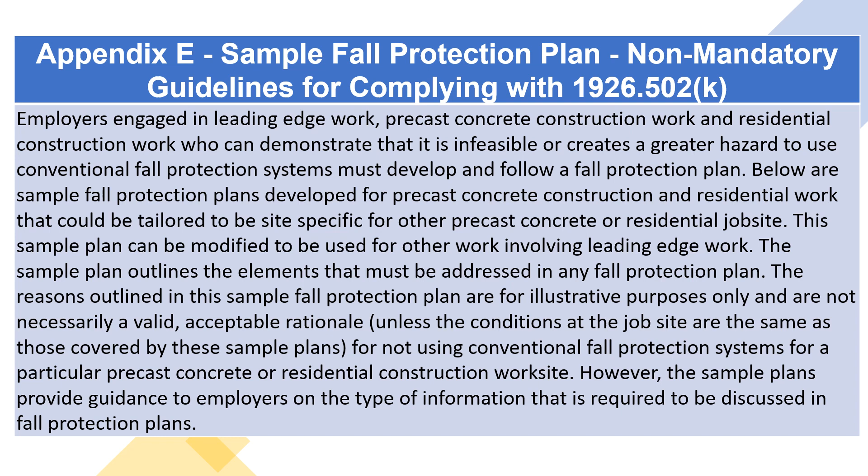The reasons outlined in this sample fall protection plan are for illustrative purposes only and are not necessarily a valid, acceptable rationale, unless the conditions at the job site are the same as those covered by these sample plans, for not using conventional fall protection systems for a particular precast concrete or residential construction worksite. However, the sample plans provide guidance to employers on the type of information that is required to be discussed in fall protection plans. Sample Fall Protection Plans.

Fall Protection Plan for Precast/Pre-Stress Concrete Structures. This fall protection plan is specific for the following project: location of job, erecting company, date plan prepared or modified, plan prepared by, plan approved by, plan supervised by.

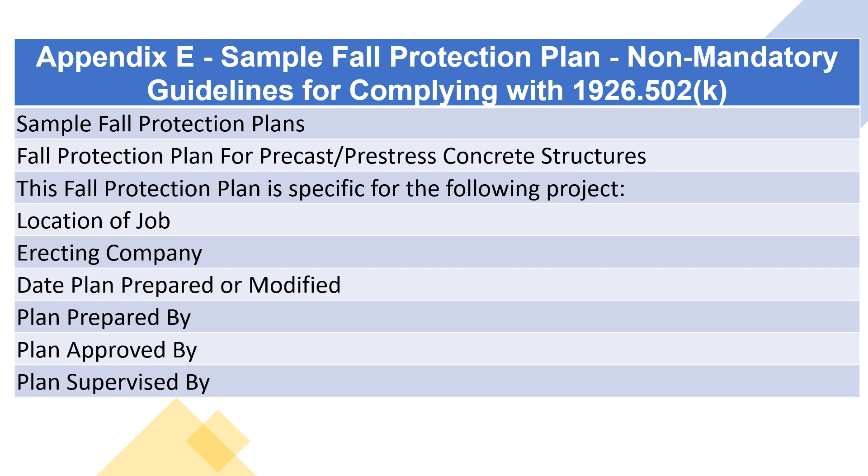The following fall protection plan is a sample program prepared for the prevention of injuries associated with falls. A fall protection plan must be developed and evaluated on a site-by-site basis. It is recommended that erectors discuss the written fall protection plan with their OSHA area office prior to going on a job site. Statement of company policy.

Company name is dedicated to the protection of its employees from on-the-job injuries. All employees of company name have the responsibility to work safely on the job. The purpose of this plan is: A, to supplement our standard safety policy by providing safety standards specifically designed to cover fall protection on this job; and B, to ensure that each employee is trained and made aware of the safety provisions which are to be implemented by this plan prior to the start of erection.

This fall protection plan addresses the use of other than conventional fall protection at a number of areas on the project, as well as identifying specific activities that require non-conventional means of fall protection. These areas include: A, connecting activity, point of erection; B, leading edge work; C, unprotected sides or edges;

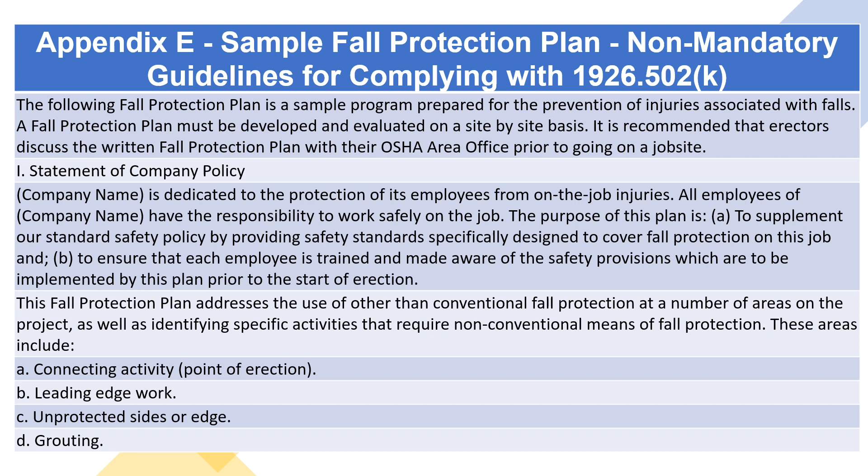D, grouting. This plan is designed to enable employers and employees to recognize the fall hazards on this job and to establish the procedures that are to be followed in order to prevent falls to lower levels or through holes and openings in walking/working surfaces. Each employee will be trained in these procedures and strictly adhere to them except when doing so would expose the employee to a greater hazard.

If, in the employee's opinion, this is the case, the employee is to notify the foreman of the concern, and the concern addressed before proceeding.

Safety policy and procedure on any one project cannot be administered, implemented, monitored, and enforced by any one individual. The total objective of a safe, accident-free work environment can only be accomplished by a dedicated, concerted effort by every individual involved with the project, from management down to the last employee.

Each employee must understand their value to the company, the costs of accidents both monetary, physical, and emotional, the objective of the safety policy and procedures, the safety rules that apply to the safety policy and procedures, and what their individual role is in administering, implementing, monitoring, and compliance of their safety policy and procedures.

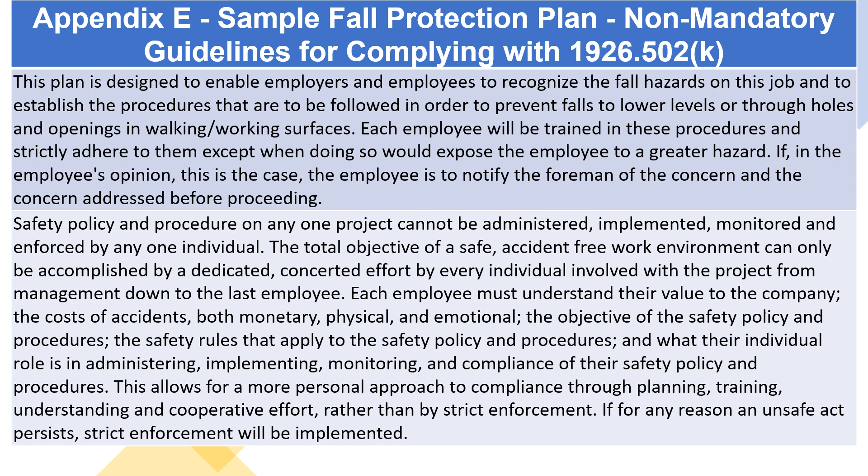This allows for a more personal approach to compliance through planning, training, understanding, and cooperative effort, rather than by strict enforcement. If for any reason an unsafe act persists, strict enforcement will be implemented.

It is the responsibility of the named competent person to implement this fall protection plan. The competent person is responsible for continual observational safety checks of their work operations and to enforce the safety policy and procedures. The foreman also is responsible to correct any unsafe acts or conditions immediately.

It is the responsibility of the employee to understand and adhere to the procedures of this plan and to follow the instructions of the foreman. It is also the responsibility of the employee to bring to management's attention any unsafe or hazardous conditions or acts that may cause injury to either themselves or any other employees.

Any changes to this fall protection plan must be approved by the named qualified person.

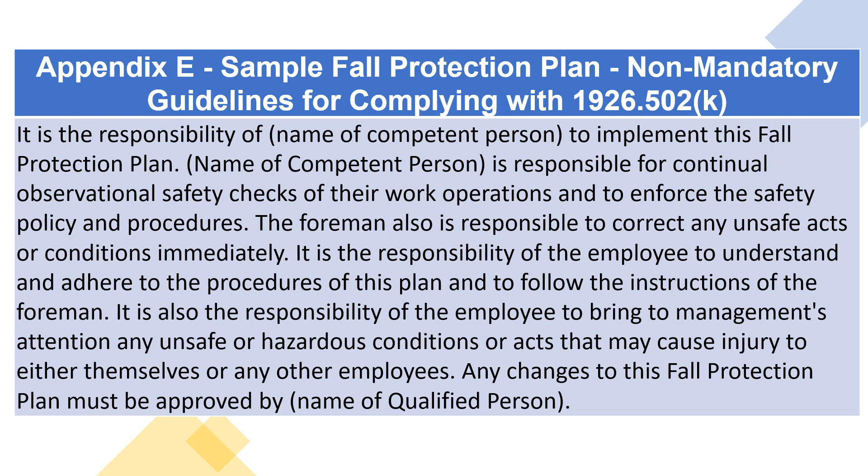Fall protection systems to be used on this project. Where conventional fall protection is infeasible or creates a greater hazard at the leading edge and during initial connecting activity, we plan to do this work using a safety monitoring system and expose only a minimum number of employees for the time necessary to actually accomplish the job.

The maximum number of workers to be monitored by one safety monitor is 6. We are designating the following trained employees as designated erectors, and they are permitted to enter the controlled access zones and work without the use of conventional fall protection.

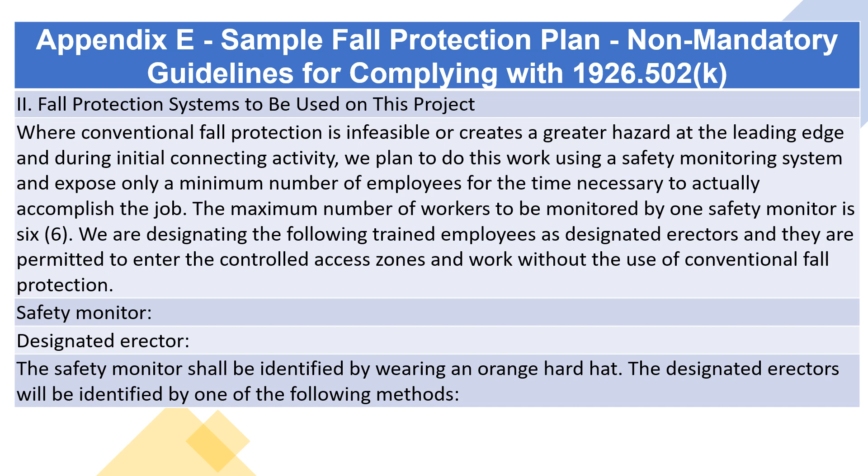Safety monitor, designated erector. The safety monitor shall be identified by wearing an orange hard hat. The designated erectors will be identified by one of the following methods: they will wear a blue-colored armband, or they will wear a blue-colored hard hat, or they will wear a blue-colored vest.

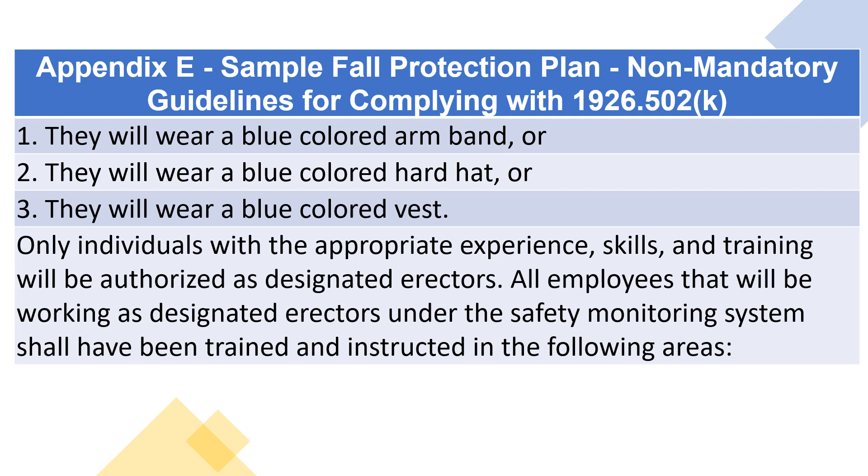Only individuals with the appropriate experience, skills, and training will be authorized as designated erectors. All employees that will be working as designated erectors under the safety monitoring system shall have been trained and instructed in the following areas: 1. Recognition of the fall hazards in the work area, at the leading edge and when making initial connections point of erection.

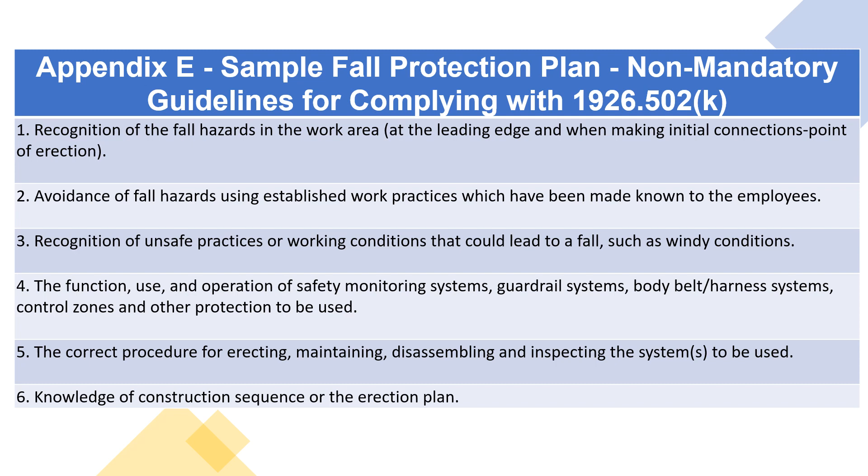2. Avoidance of fall hazards using established work practices which have been made known to the employees. 3. Recognition of unsafe practices or working conditions that could lead to a fall, such as windy conditions. 4. The function, use, and operation of safety monitoring systems, guardrail systems, body belt/harness systems, control zones, and other protection to be used. 5. The correct procedure for erecting, maintaining, disassembling, and inspecting the systems to be used. 6. Knowledge of construction sequence or the erection plan.

A conference will take place prior to starting work involving all members of the erection crew, crane crew, and supervisors of any other concerned contractors. This conference will be conducted by the precast concrete erection supervisor in charge of the project. During the pre-work conference, erection procedures and sequences pertinent to this job will be thoroughly discussed and safety practices to be used throughout the project will be specified.

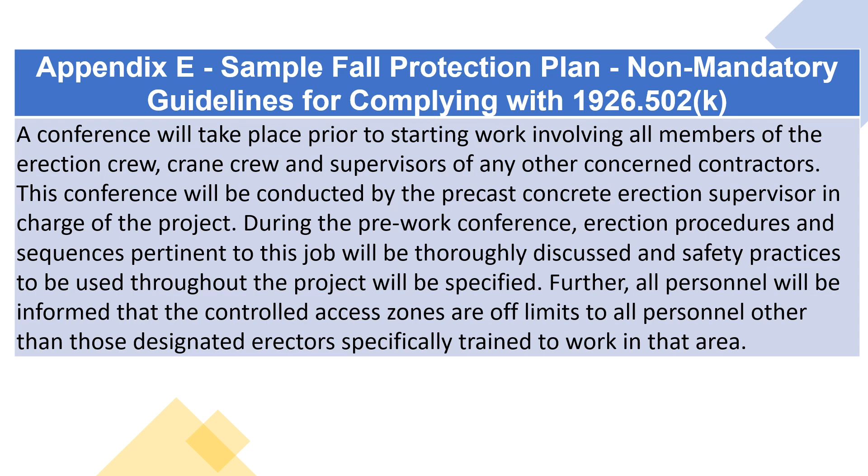Further, all personnel will be informed that the controlled access zones are off limits to all personnel other than those designated erectors specifically trained to work in that area.

Safety monitoring system: a fall protection system in which a competent person is responsible for recognizing and warning employees of fall hazards. The duties of the safety monitor are: 1. Warn by voice when approaching the open edge in an unsafe manner. 2. Warn by voice if there is a dangerous situation developing which cannot be seen by another person involved with product placement, such as a member getting out of control.

3. Make the designated erectors aware they are in a dangerous area. 4. Be competent in recognizing fall hazards. 5. Warn employees when they appear to be unaware of a fall hazard or are acting in an unsafe manner. 6. Be on the same walking/working surface as the monitored employees and within visual sighting distance of the monitored employees. 7. Be close enough to communicate orally with the employees. 8. Not allow other responsibilities to encumber monitoring.

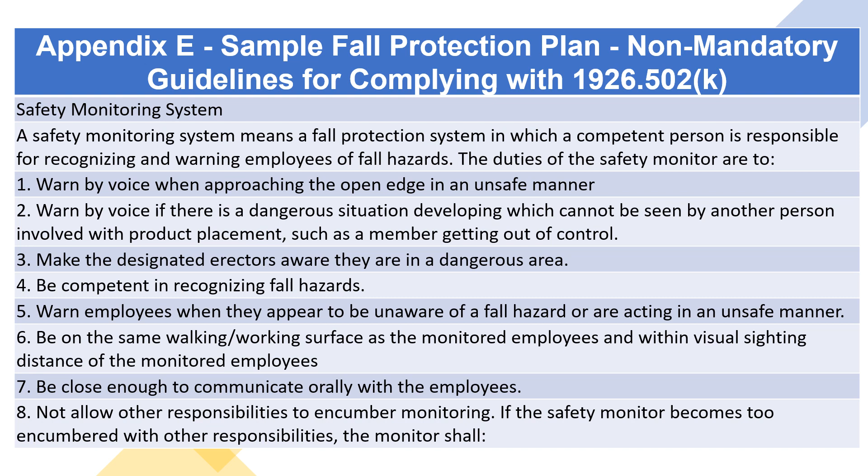If the safety monitor becomes too encumbered with other responsibilities, the monitor shall: 1. Stop the erection process, and 2. Turn over other responsibilities to a designated erector, or 3. Turn over the safety monitoring function to another designated, competent person.

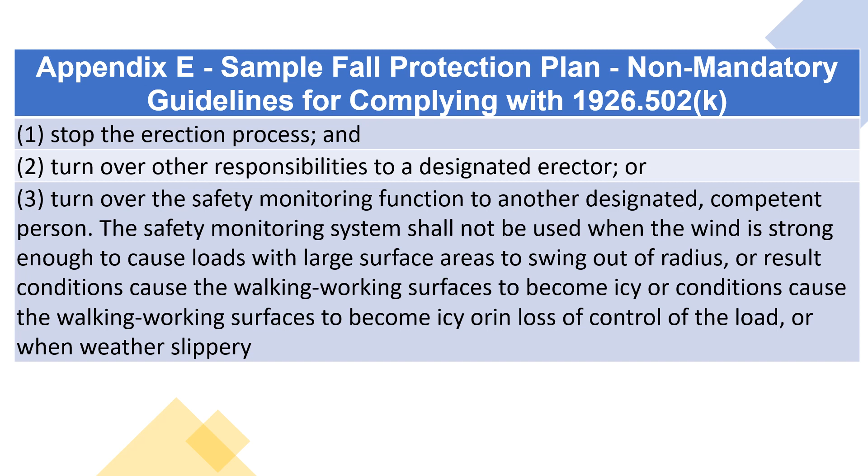The safety monitoring system shall not be used when the wind is strong enough to cause loads with large surface areas to swing out of radius, or conditions cause the walking working surfaces to become icy, or there is loss of control of the load, or when weather is slippery.

Control zone system. A controlled access zone means an area designated and clearly marked, in which leading edge work may take place without the use of guardrail, safety net, or personal fall arrest systems to protect the employees in the area. Control zone systems shall comply with the following provisions.

1. When used to control access to areas where leading edge and other operations are taking place, the controlled access zone shall be defined by a control line or by any other means that restricts access. When control lines are used, they shall be erected not less than 6 feet (1.8 m), nor more than 60 feet (18 meters), or half the length of the member being erected, whichever is less, from the leading edge.

2. The control line shall extend along the entire length of the unprotected or leading edge and shall be approximately parallel to the unprotected or leading edge.

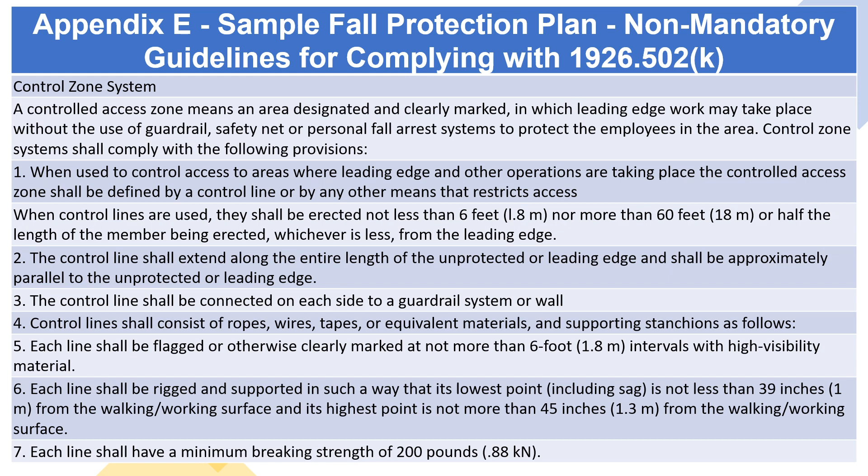The control line shall be connected on each side to a guardrail system or wall. Control lines shall consist of ropes, wires, tapes, or equivalent materials, and supporting stanchions. Each line shall be flagged or otherwise clearly marked at intervals of not more than 6 feet (1.8 m) with high visibility material. Each line shall be rigged and supported so that its lowest point, including sag, is not less than 39 inches (1 meter) from the walking/working surface, and its highest point is not more than 45 inches (1.3 meters) from the walking/working surface. Each line shall have a minimum breaking strength of 200 pounds (0.88 kN).

Holes: all openings greater than 12 inches by 12 inches will have perimeter guarding or covering. All predetermined holes will have plywood covers made in the precaster's yard and shipped with the member to the job site. Prior to cutting holes on the job, proper protection for the hole must be provided to protect the workers. Perimeter guarding or covers will not be removed without the approval of the erection foreman.

Precast concrete column erection through the existing deck requires that many holes be provided through this deck. These are to be covered and protected. Except for the opening currently being used to erect a column, all opening protection is to be left undisturbed. The opening being uncovered to erect a column will become part of the point of erection and will be addressed as part of this fall protection plan. This uncovering is to be done at the erection foreman's direction and will only occur immediately prior to feeding the column through the opening. Once the end of the column is through the slab opening, there will no longer exist a fall hazard at this location.

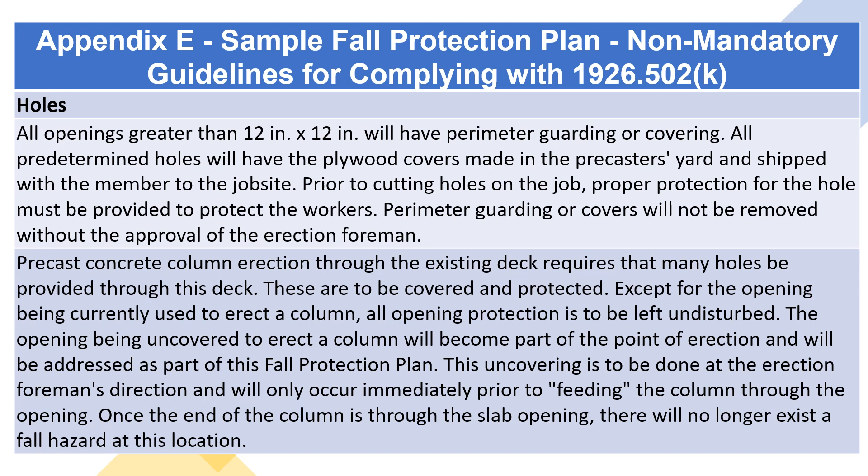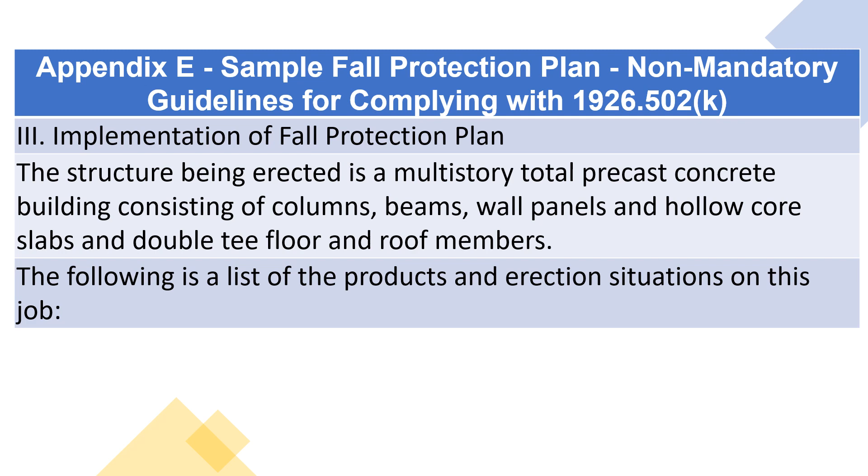Implementation of the fall protection plan. The structure being erected is a multi-story total precast concrete building consisting of columns, beams, wall panels, hollow core slabs, and double tee floor and roof members. The following is a list of the products and erection situations on this job.

Columns: for columns 10 feet to 36 feet long, employees disconnecting crane hooks from columns will work from a ladder and wear a body belt/harness with lanyard, tying off when both hands are needed to disconnect. For tying off, a vertical lifeline will be connected to the lifting eye at the top of the column, prior to lifting, to be used with a manually operated or mobile rope grab. For columns too high for the use of a ladder, 36 feet and higher, an added cable will be used to reduce the height of the disconnecting point so that a ladder can be used.

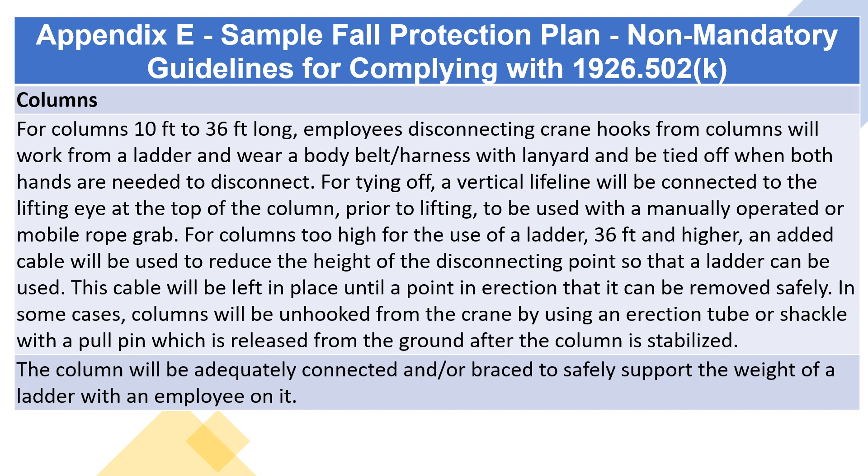This cable will be left in place until a point in erection when it can be removed safely. In some cases, columns will be unhooked from the crane using an erection tube or shackle with a pull pin, which is released from the ground after the column is stabilized. The column will be adequately connected and/or braced to safely support the weight of a ladder with an employee on it.

Inverted T-beams: employees erecting inverted T-beams at a height of 6 to 40 feet will erect the beam, make initial connections, and final alignment from a ladder. If the employee needs to reach over the side of the beam to bar or adjust the alignment of the beam, they will mount the beam and tie off to the lifting device in the beam after ensuring the load has been stabilized on its bearing. To disconnect the crane from the beam, an employee will stand a ladder against the beam.

Because the use of ladders is not practical at heights above 40 feet, beams will be initially placed using taglines, with their final alignment made by a person on a man lift or similar employee positioning system.

Spandrel beams at the exterior of the building will be aligned as closely as possible using taglines, with the final placement of the spandrel beam made from a ladder at the open end of the structure. A ladder will be used to make the initial connections and a ladder will be used to disconnect the crane. The other end of the beam will be placed by the designated erector from the double T deck under the observation of the safety monitor.

The beams will be adequately connected and/or braced to safely support the weight of a ladder with an employee on it, for floor and roof members.

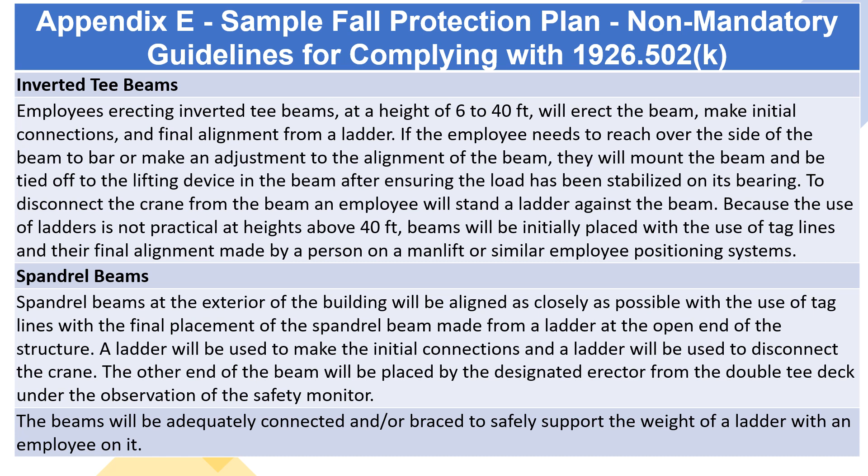During installation of the precast concrete floor and/or roof members, the work deck continuously increases in area as more and more units are being erected and positioned.

Thus, the unprotected floor/roof perimeter is constantly modified with the leading edge changing location as each member is installed. Fall protection for workers at the leading edge shall be assured by properly constructed and maintained control zone lines not more than 60 feet away from the leading edge, supplemented by a safety monitoring system to ensure the safety of all designated erectors working within the area defined by the control zone lines.

The hollow core slabs erected on the masonry portion of the building will be erected and grouted using the safety monitoring system. Grout will be placed in the space between the end of the slab and face shell of the concrete masonry by dumping from a wheelbarrow.

The grout in the keyways between the slabs will be dumped from a wheelbarrow and then spread with long-handled tools, allowing the worker to stand erect facing toward the unprotected edge and back from any workdeck edge.

Whenever possible, the designated erectors will approach the incoming member at the leading edge only after it is below waist height so that the member itself provides protection against falls.

Except for the situations described below, when the arriving floor or roof member is within 2 to 3 inches of its final position, the designated erectors can then proceed to their position of erection at each end of the member under the control of the safety monitor.

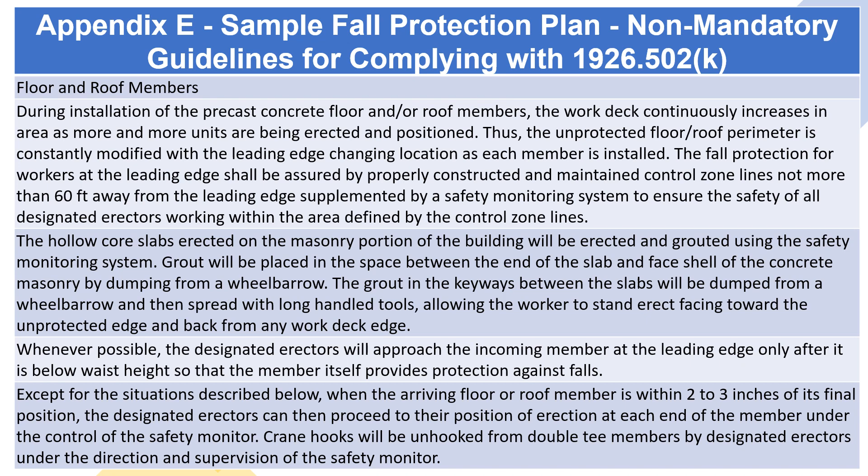Crane hooks will be unhooked from double T members by designated erectors under the direction and supervision of the safety monitor. Designated erectors, while waiting for the next floor or roof member, will be constantly under the control of the safety monitor for fall protection and are directed to stay a minimum of 6 feet from the edge.

In the event a designated erector must move from one end of a member which has just been placed at the leading edge, they must first move away from the leading edge a minimum of 6 feet and then progress to the other end while maintaining the minimum distance of 6 feet at all times.

Erection of double Ts, where conditions require bearing of one end into a closed pocket and the other end on a beam ledge, restricting the T-legs from going directly into the pockets, requires special considerations. The T-legs that are to bear in the closed pocket must hang lower than those at the beam bearing.

The double T will be two-lined in order to elevate one end higher than the other to allow for the low end to be ducked into the closed pocket, using the following procedure.

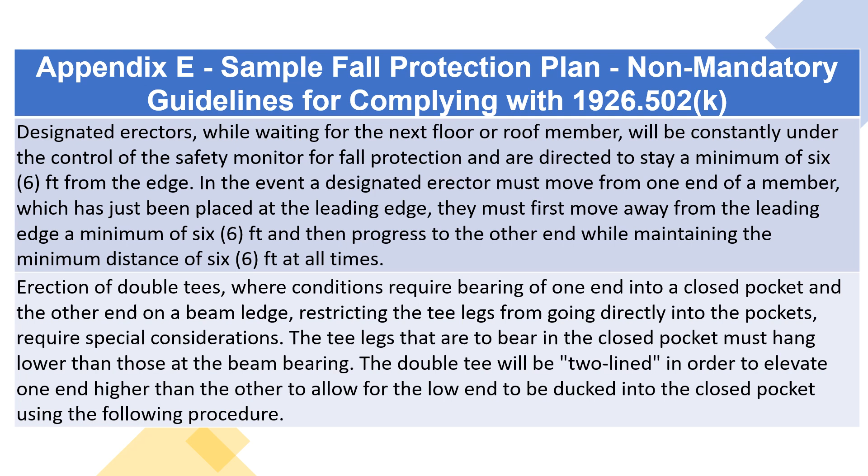The double T will be rigged with a standard 4-way spreader off of the main load line. An additional choker will be attached to the married point of the two-legged spreader at the end of the T that is to be elevated.

The double T will be hoisted with the main load line and swung into a position as close as possible to the T's final bearing elevation. When the T is in this position and stabilized, the whip line load block will be lowered to just above the T deck.

At this time, two erectors will walk out on the suspended T deck at mid-span of the T member and pull the load block to the end of the T to be elevated and attach the additional choker to the load block.

The possibility of entanglement with the crane lines and other obstacles during this two-lining process, while raising and lowering the crane block on that second line, could be hazardous to an encumbered employee. Therefore, the designated erectors will not tie off during any part of this process. While the designated erectors are on the double T, the safety monitoring system will be used.

After attaching the choker, the two erectors then step back on the previously erected T deck and signal the crane operator to hoist the load with the whip line to the elevation that will allow for enough clearance to let the low-end T-legs slide into the pockets when the main load line is lowered.

The erector who is handling the lowered end of the T at the closed pocket bearing will step out on the suspended T.

An erection bar will be placed between the end of the T-leg and the inside face of the pocketed spandrel member. The T is barred away from the pocketed member to reduce the friction and lateral force against it. As the T is being lowered, the other erector remains on the previously erected T to handle the other end. The T is then slowly lowered by the crane to a point where the T-legs can freely slide into the pockets.

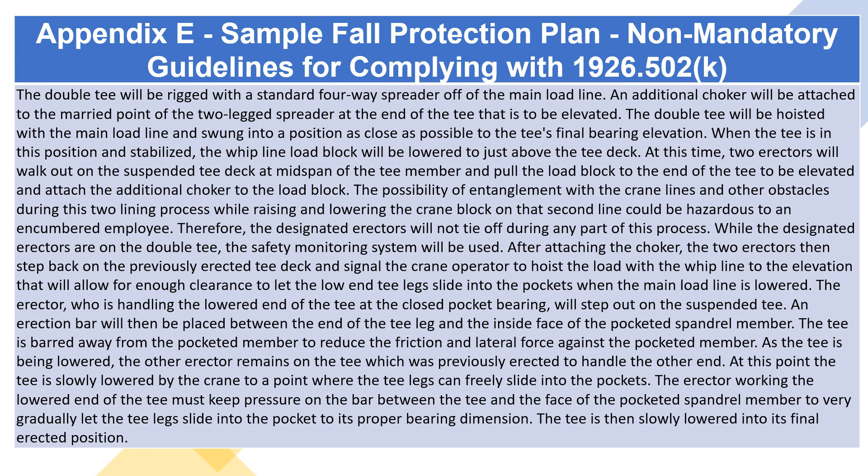The erector working the lowered end of the T must keep pressure on the bar between the T and the face of the pocketed spandrel member, gradually letting the T-leg slide into the pocket to its proper bearing dimension. The T is then slowly lowered into its final erected position.

The designated erector should be allowed onto the suspended double T, otherwise there is no control over its horizontal movement, which could knock the spandrel off its bearing or the column out of plumb. The control necessary to prevent hitting the spandrel can only be done safely from the top of the double T being erected.

Load-bearing wall panels: the erection of load-bearing wall panels on elevated decks requires the use of a safety monitor and a controlled access zone, a minimum of 25 feet and a maximum of half the length of the wall panels away from the unprotected edge, so that designated erectors can move freely and unencumbered when receiving the panels.

Bracing, if required for stability, will be installed by ladder. After the braces are secured, the crane will be disconnected from the wall using a ladder. The wall-to-wall connections will also be performed from a ladder.

Non-load-bearing panels, cladding: the locating of survey lines, panel layout, and other installation prerequisites, pre-welding, etc., for non-load-bearing panels and cladding will not commence until the floor perimeter and floor openings have been protected.

In some areas, panel configuration requires removing the perimeter protection as the cladding is being installed. This removal will be performed on a bay-to-bay basis, just ahead of cladding erection, to minimize temporarily unprotected floor edges. Workers within 6 feet of the edge, receiving and positioning the cladding when the perimeter protection is removed, shall be tied off.

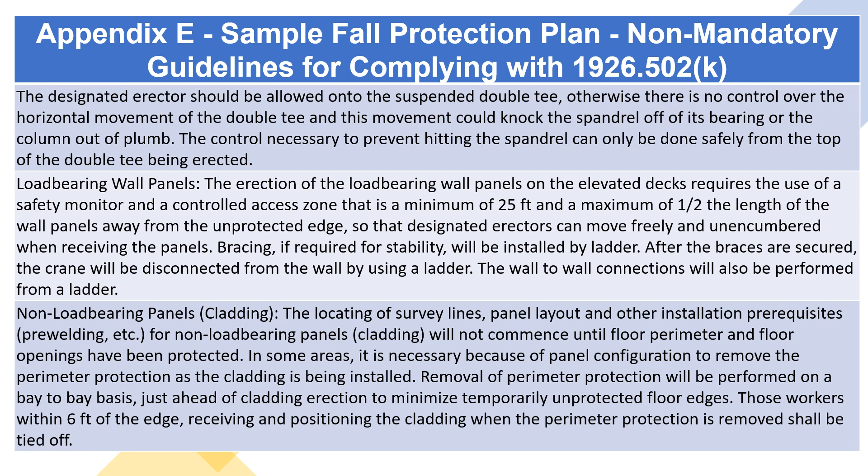Detailing: employees exposed to falls of 6 feet or more to lower levels, who are not actively engaged in leading edge work or connecting activity such as welding, bolting, cutting, bracing, guying, patching, or painting, and who are working less than 6 feet from an unprotected edge, will be tied off at all times or guardrails will be installed.

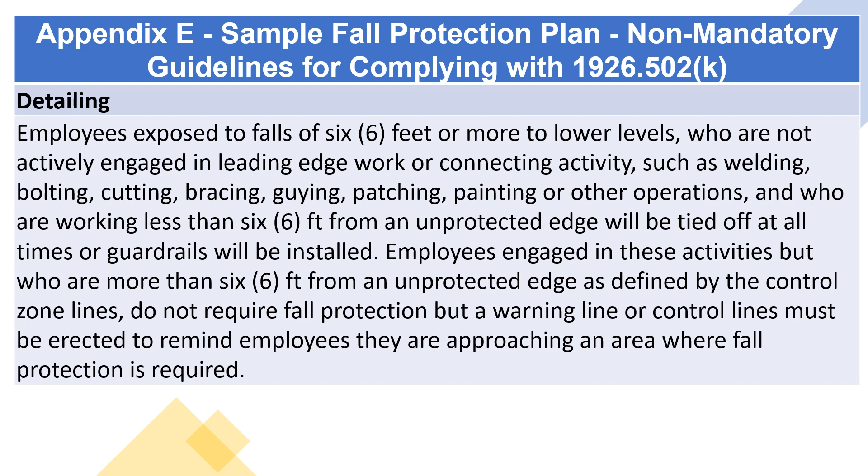Employees engaged in these activities but who are more than 6 feet from an unprotected edge, as defined by the control zone lines, do not require fall protection, but a warning line or control line must be erected to remind employees they are approaching an area where fall protection is required. Conventional fall protection is considered for the point of erection or leading edge erection operations.

Personal fall arrest systems: in this particular erection sequence and procedure, personal fall arrest systems requiring body belt or harness systems, lifelines, and lanyards will not reduce possible hazards to workers, and will create offsetting hazards during their usage at the leading edge of precast/pre-stressed concrete construction.

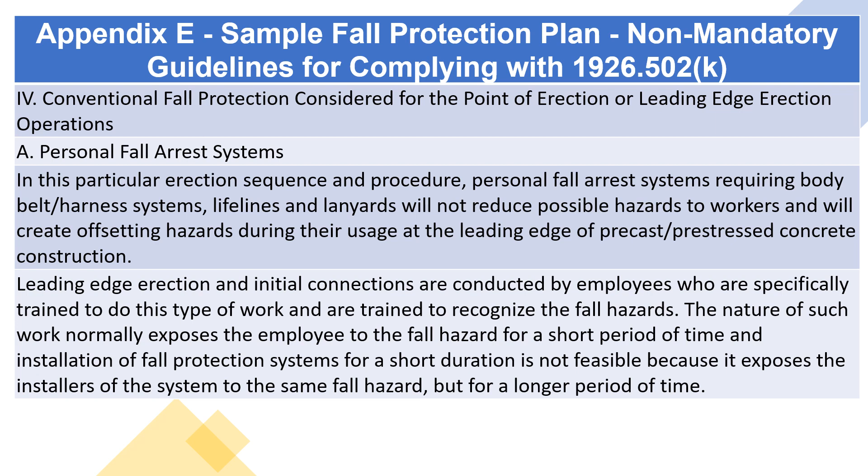Leading edge erection and initial connections are conducted by employees specifically trained to do this type of work and trained to recognize the fall hazards. The nature of such work normally exposes the employee to the fall hazard for only a short period of time, and installation of fall protection systems for such a short duration is not feasible, because it exposes the installers of the system to the same fall hazard, but for a longer period of time.

First, it is necessary that the employee be able to move freely without encumbrance in order to guide sections of precast concrete into their final position, without having lifelines attached which would restrict the employee's ability to move about at the point of erection.

Second, a typical procedure requires two or more workers to maneuver around each other as a concrete member is positioned to fit into the structure. If each is attached to a lifeline, part of their attention must be diverted from positioning a member weighing several tons to avoiding entanglement of their lifelines or tripping over lanyards. Therefore, if these workers are attached to lanyards, more fall potential would result than from not using such a device.

In this specific erection sequence and procedure, retractable lifelines do not solve the problem of 2 workers becoming tangled. In fact, such a tangle could prevent the lifeline from retracting as the worker moved, thus potentially exposing the worker to a fall greater than 6 feet. Also, a worker crossing over the lifeline of another worker can create a hazard because the movement of one person can unbalance the other. In the event of a fall by one person, there is a likelihood that the other person will be caused to fall as well.

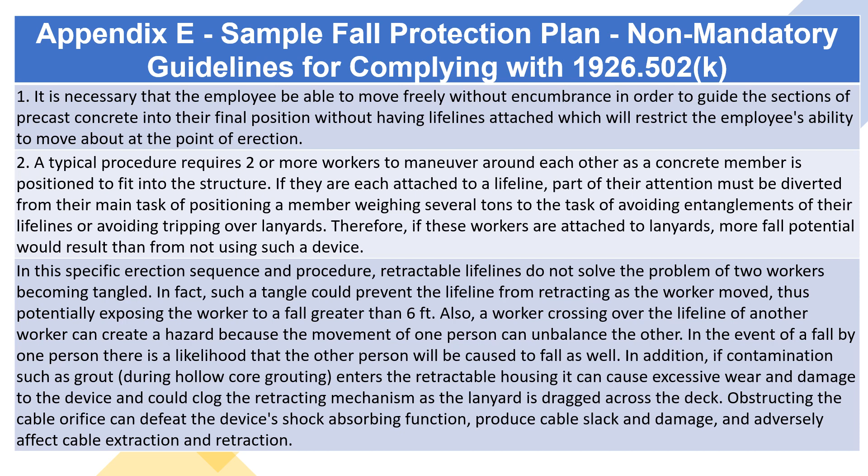In addition, if contamination such as grout, during hollow core grouting, enters the retractable housing, it can cause excessive wear and damage to the device and could clog the retracting mechanism as the lanyard is dragged across the deck. Obstructing the cable orifice can defeat the device's shock-absorbing function, produce cable slack and damage, and adversely affect cable extraction and retraction.

3. Employees tied to a lifeline can be trapped and crushed by moving structural members if the employee becomes restrained by the lanyard or retractable lifeline and cannot get out of the path of the moving load. The sudden movement of a precast concrete member being raised by a crane can be caused by a number of factors. When this happens, a connector may immediately have to move a considerable distance to avoid injury. If a tied-off body belt/harness is being used, the connector could be trapped. Therefore, there is a greater risk of injury if the connector is tied to the structure for this specific erection sequence and procedure.

When necessary to move away from a retractable device, the worker cannot move at a rate greater than the device locking speed, typically 3.5 to 4.5 feet per second. When moving toward the device, it is necessary to move at a rate which does not permit cable slack to build up. This slack may cause cable retraction acceleration and cause a worker to lose their balance by applying a higher than normal jerking force on the body when the cable suddenly becomes taut after building up momentum. This slack can also cause damage to the internal spring-loaded drum, uneven coiling of cable on the drum, and possible cable damage.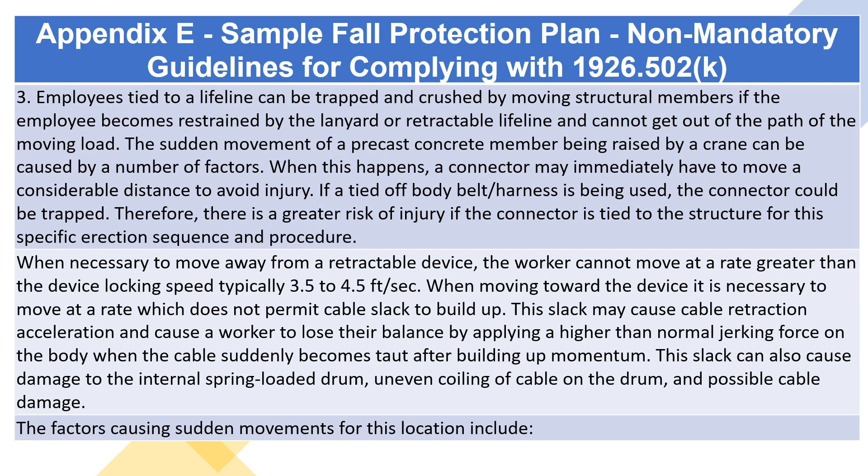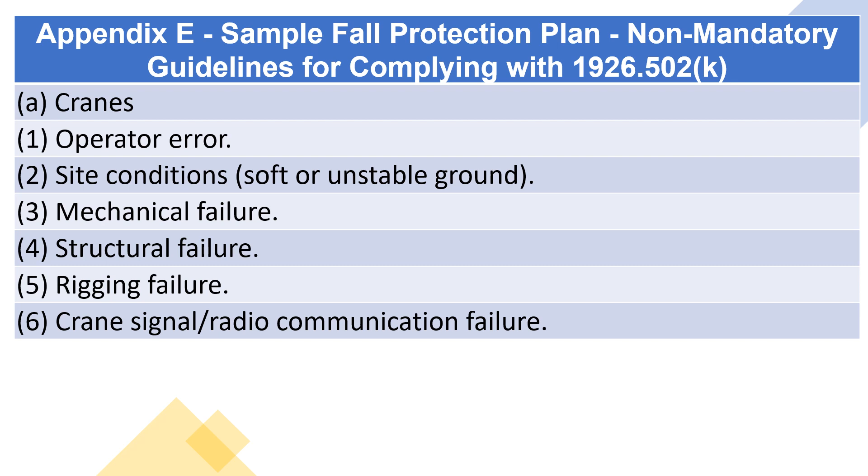The factors causing sudden movements for this location include: A. Cranes. 1. Operator error. 2. Site conditions, soft or unstable ground. 3. Mechanical failure. 4. Structural failure. 5. Rigging failure. 6. Crane signal/radio communication failure. B. Weather conditions. 1. Wind, strong wind/sudden gusting, particularly a problem with the large surface areas of precast concrete members. 2. Snow/rain, visibility. 3. Fog, visibility. 4. Cold, causing slowed reactions or mechanical problems.

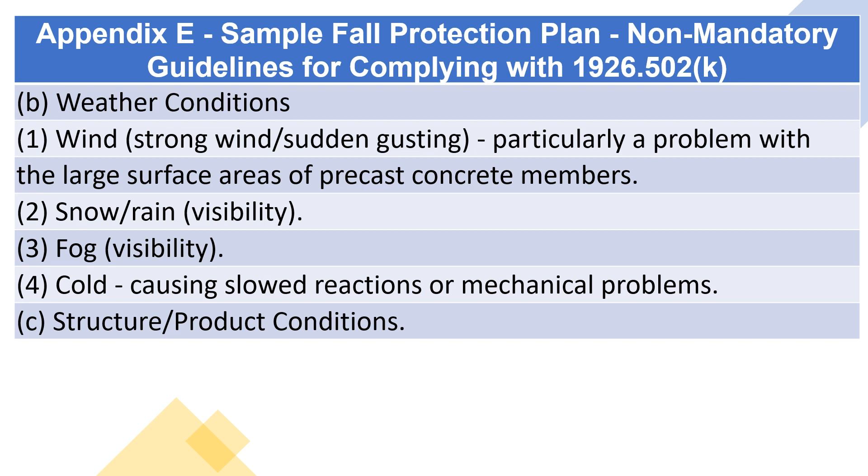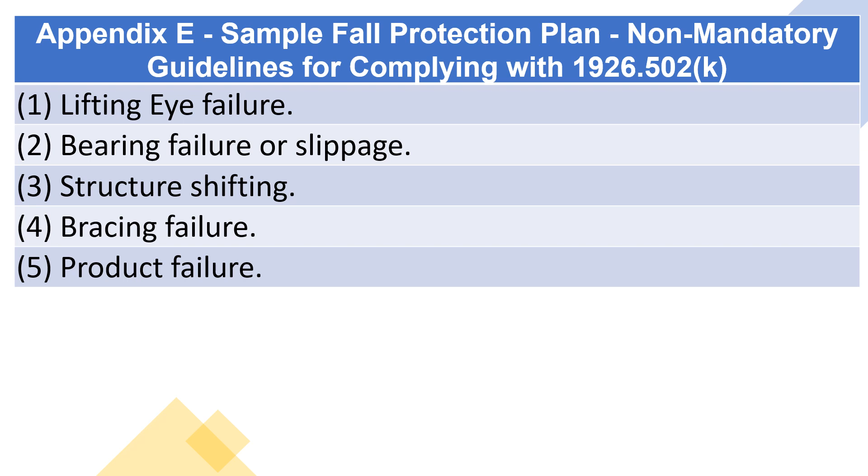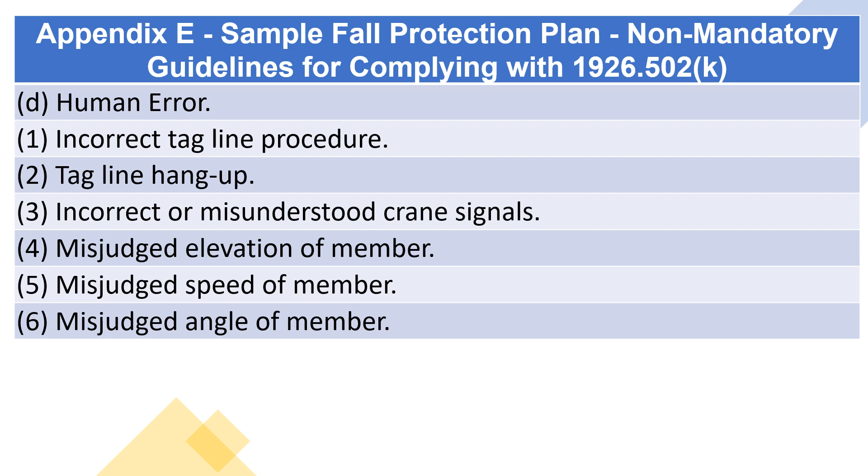C. Structure/product conditions. 1. Lifting eye failure. 2. Bearing failure or slippage. 3. Structure shifting. 4. Bracing failure. 5. Product failure. D. Human error. 1. Incorrect tagline procedure. 2. Tagline hang-up. 3. Incorrect or misunderstood crane signals. 4. Misjudged elevation of member. 5. Misjudged speed of member. 6. Misjudged angle of member.

4. Anchorages or special attachment points could be cast into the precast concrete members if sufficient pre-planning and consideration of erector's position is done before the members are cast. Any hole or other attachment must be approved by the engineer who designed the member. It is possible that some design restrictions will not allow a member to be weakened by an additional hole. However, it is anticipated that such situations would be the exception, not the rule.

Attachment points, other than on the deck surface, will require removal and/or patching. Removing and/or patching these points requires the employee to be exposed to an additional fall hazard at an unprotected perimeter. The fact that attachment points could be available anywhere on the structure does not eliminate the hazards of using these points for tying off as discussed above. A logical point for tying off on double T's would be using the lifting loops, except that they must be cut off to eliminate a tripping hazard at an appropriate time.

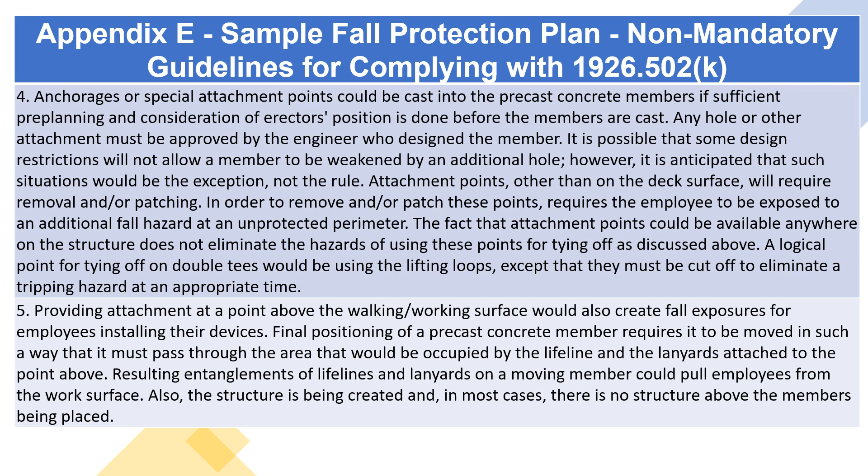5. Providing attachment at a point above the walking/working surface would also create fall exposures for employees installing their devices. Final positioning of a precast concrete member requires it to be moved in such a way that it must pass through the area that would be occupied by the lifeline and the lanyards attached to the point above. Resulting entanglements of lifelines and lanyards on a moving member could pull employees from the work surface. Also, the structure is being created and, in most cases, there is no structure above the members being placed. A. Temporary structural supports, installed to provide attaching points for lifelines, limit the space which is essential for orderly positioning, alignment and placement of the precast concrete members.

To keep the lanyards a reasonable and manageable length, lifeline supports would necessarily need to be in proximity to the positioning process. A sudden shift of the precast concrete member being positioned because of wind pressure or crane movement could make it strike the temporary supporting structure, moving it suddenly and causing tied-off employees to fall.

B. The time in man-hours which would be expended in placing and maintaining temporary structural supports for lifeline attaching points could exceed the expended man-hours involved in placing the precast concrete members. No protection could be provided for the employees erecting the temporary structural supports, and these supports would have to be moved for each successive step in the construction process, thus greatly increasing the employee's exposure to the fall hazard.

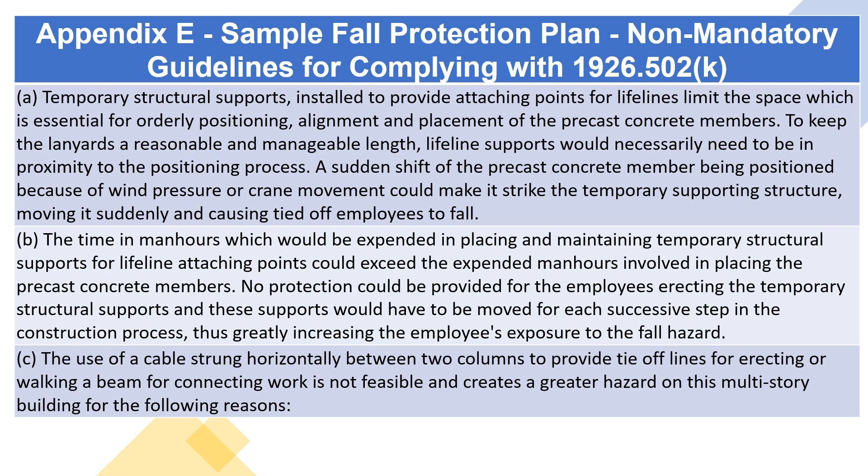C. The use of a cable strung horizontally between two columns to provide tie-off lines for erecting or walking a beam for connecting work is not feasible and creates a greater hazard on this multi-story building for the following reasons. 1. If a connector is to use such a line, it must be installed between the two columns. To perform this installation requires an erector to have more fall exposure time attaching the cable to the columns than would be spent to make the beam-to-column connection itself.

2. If such a line is to be installed so that an erector can walk along a beam, it must be overhead or below him. For example, if a connector must walk along a 24 inches wide beam, the presence of a line next to the connector at waist level, attached directly to the columns, would prevent the connector from centering their weight over the beam and balancing themselves.

Installing the line above the connector might be possible on the first level of a two-story column. However, the column may extend only a few feet above the floor level at the second level or be flush with the floor level. Attaching the line to the side of the beam could be a solution, however, it would require the connector to attach the lanyard below foot level, which would most likely extend a fall farther than 6 feet.

3. When lines are strung over every beam, it becomes more and more difficult for the crane operator to lower a precast concrete member into position without the member becoming fouled. Should the member become entangled, it could easily dislodge the line from a column. If a worker is tied to it at the time, a fall could be caused.

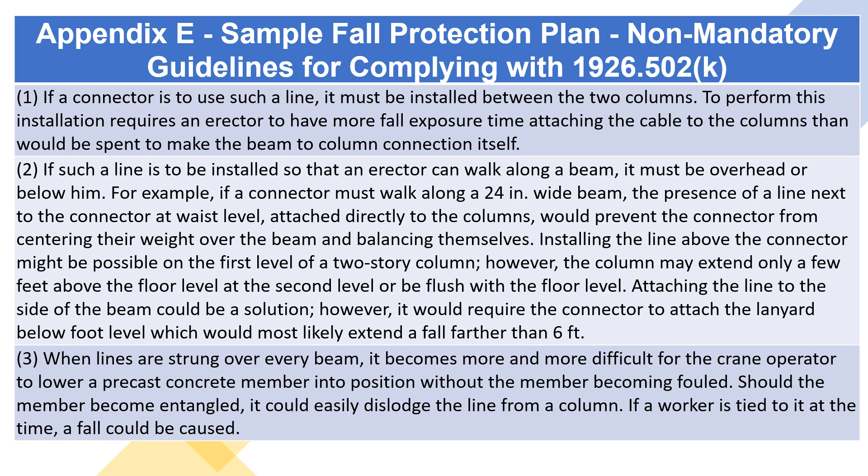6. The ANSI A10.14-1991 American National Standard for Construction and Demolition Operations requirements for safety belts, harnesses, lanyards and lifelines for construction and demolition use states that the anchor point of a lanyard or deceleration device should, if possible, be located above the wearer's belt or harness attachment. ANSI A10.14 also states that a suitable anchorage point is one which is located as high as possible to prevent contact with an obstruction below should the worker fall.

Most manufacturers also warn in the user's handbook that the safety block/retractable lifeline must be positioned above the D-ring, above the workspace of the intended user, and OSHA recommends that fall arrest and restraint equipment be used in accordance with the manufacturer's instructions. Attachment of a retractable device to a horizontal cable near floor level or using the inserts in the floor or roof members may result in increased free fall due to the dorsal D-ring of the full-body harness riding higher than the attachment point of the snap hook to the cable or insert, e.g., 6-foot-tall worker with a dorsal D-ring at 5 feet above the floor or surface, reduces the working length to only 1 foot by placing the anchorage 5 feet away from the fall hazard.

In addition, impact loads may exceed maximum fall arrest forces, MAF, because the fall arrest D-ring would be 4 to 5 feet higher than the safety block/retractable lifeline anchored to the walking working surface, and the potential for swing hazards is increased. Manufacturers also require that workers not work at a level where the point of snap hook attachment to the body harness is above the device because this will increase the free fall distance and the deceleration distance and will cause higher forces on the body in the event of an accidental fall.

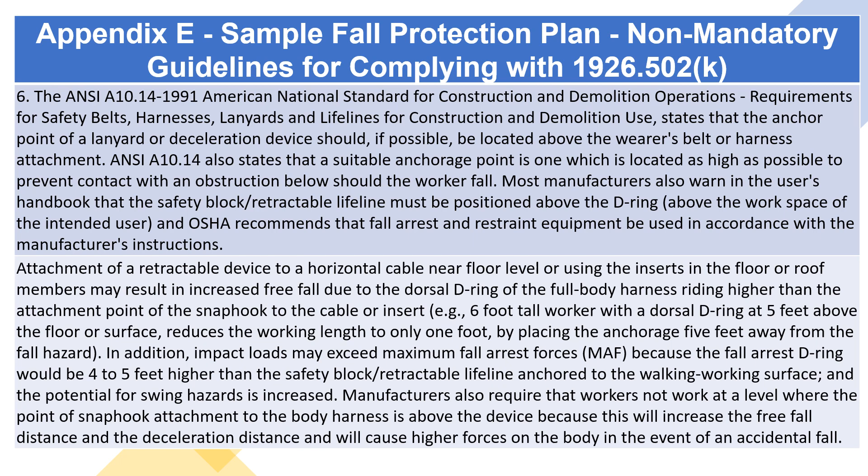Manufacturers recommend an anchorage for the retractable lifeline which is immovably fixed in space and is independent of the user's support systems. A movable anchorage is one which can be moved around, such as equipment or wheeled vehicles, or which can deflect substantially under shock loading, such as a horizontal cable or very flexible beam.

In the case of a very flexible anchorage, a shock load applied to the anchorage during fall arrest can cause oscillation of the flexible anchorage such that the retractable brake mechanism may undergo one or more cycles of locking/unlocking/locking, ratchet effect, until the anchorage deflection is dampened. Therefore, use of a movable anchorage involves critical engineering and safety factors and should only be considered after fixed anchorage has been determined to be not feasible.

Horizontal cables used as an anchorage present an additional hazard due to amplification of the horizontal component of maximum arrest force of a fall, transmitted to the points where the horizontal cable is attached to the structure. This amplification is due to the angle of sag of a horizontal cable and is most severe for small angles of sag. For a cable sag angle of 2 degrees, the horizontal force on the points of cable attachment can be amplified by a factor of 15.

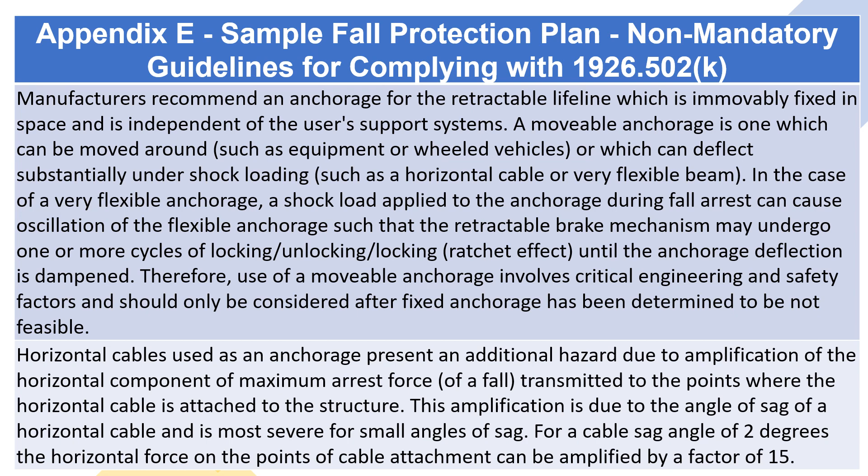It is also necessary to install the retractable device vertically overhead to minimize swing falls. If an object is in the worker's swing path, or that of the cable, hazardous situations exist. 1. Due to the swing, horizontal speed of the user may be high enough to cause injury when an obstacle in the swing fall path is struck by either the user or the cable. 2. The total vertical fall distance of the user may be much greater than if the user had fallen only vertically without a swing fall path.

With retractable lines, overconfidence may cause the worker to engage in inappropriate behavior, such as approaching the perimeter of a floor or roof at a distance appreciably greater than the shortest distance between the anchorage point and the leading edge. Though the retractable lifeline may arrest a worker's fall before he or she has fallen a few feet, the lifeline may drag along the edge of the floor or beam and swing the worker like a pendulum until the line has moved to a position where the distance between the anchorage point and floor edge is the shortest distance between those 2 points. Accompanying this pendulum swing is a lowering of the worker, with the attendant danger that he or she may violently impact the floor or some obstruction below.

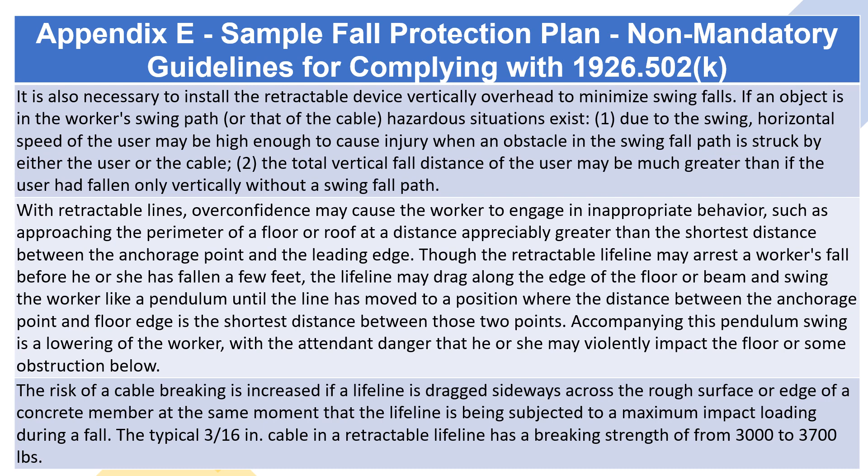The risk of a cable breaking is increased if a lifeline is dragged sideways across the rough surface or edge of a concrete member at the same moment that the lifeline is being subjected to a maximum impact loading during a fall. The typical 3/16 inch cable in a retractable lifeline has a breaking strength of from 3,000 to 3,700 pounds. 7. The competent person, who can take into account the specialized operations being performed on this project, should determine when and where a designated erector cannot use a personal fall arrest system.

B. Safety net systems. The nature of this particular precast concrete erection worksite precludes the safe use of safety nets where point of erection or leading edge work must take place. To install safety nets in the interior high bay of the single-story portion of the building poses rigging attachment problems. Structural members do not exist to which supporting devices for nets can be attached in the area where protection is required. As the erection operation advances, the location of point of erection or leading edge work changes constantly as each member is attached to the structure. Due to this constant change, it is not feasible to set net sections and build separate structures to support the nets.

2. The nature of the erection process for the precast concrete members is such that an installed net would protect workers as they position and secure only one structural member. After each member is stabilized, the net would have to be moved to a new location. This could mean a move of 8 to 10 feet or the possibility of a move to a different level or area of the structure to protect workers placing the next piece in the construction sequence. The result would be the installation and dismantling of safety nets repeatedly throughout the normal workday.

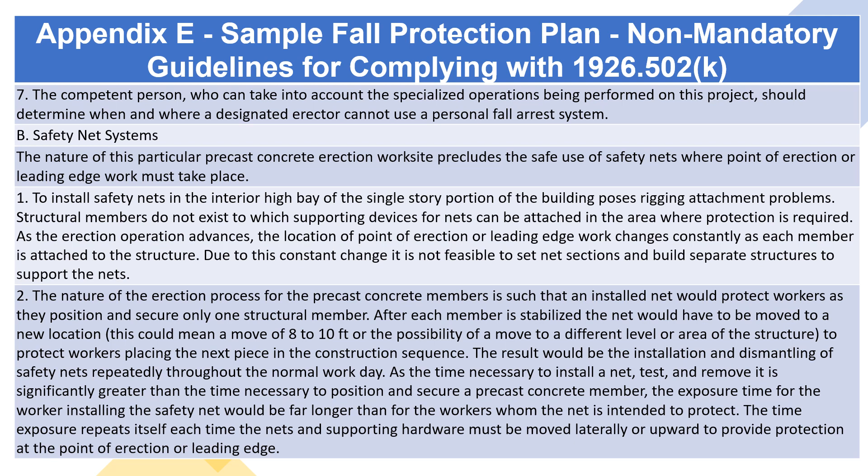As the time necessary to install a net, test, and remove it is significantly greater than the time necessary to position and secure a precast concrete member, the exposure time for the worker installing the safety net would be far longer than for the workers whom the net is intended to protect. The time exposure repeats itself each time the nets and supporting hardware must be moved laterally or upward to provide protection at the point of erection or leading edge.

Strict interpretation of 1926.502(c) requires that operation shall not be undertaken until the net is in place and has been tested. With the point of erection constantly changing, the time necessary to install and test a safety net significantly exceeds the time necessary to position and secure the concrete member.

Use of safety nets on exposed perimeter wall openings and open-sided floors causes attachment points to be left in architectural concrete, which must be patched and filled with matching material after the net supporting hardware is removed. In order to patch these openings, additional numbers of employees must be suspended by swing stages, bosun chairs, or other devices, thereby increasing the amount of fall exposure time to employees.

Installed safety nets pose an additional hazard at the perimeter of the erected structure where limited space is available in which members can be turned after being lifted from the ground by the crane. There would be a high probability that the member being lifted could become entangled in net hardware, cables, etc.

The use of safety nets where structural wall panels are being erected would prevent movement of panels to point of installation. To be effective, nets would necessarily have to provide protection across the area where structural supporting wall panels would be set and plumbed before roof units could be placed.

Use of a tower crane for the erection of the high-rise portion of the structure poses a particular hazard in that the crane operator cannot see or judge the proximity of the load in relation to the structure or nets. If the signaler is looking through nets and supporting structural devices while giving instructions to the crane operator, it is not possible to judge precise relationships between the load and the structure itself, or to nets and supporting structural devices. This could cause the load to become entangled in the net or hit the structure, causing potential damage.

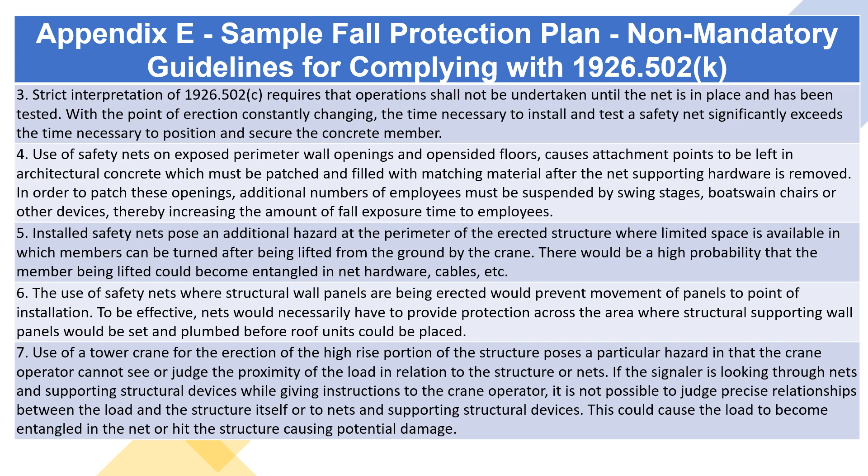Guardrail systems. On this particular worksite, guardrails, barricades, ropes, cables, or other perimeter guarding devices or methods on the erection floor will pose problems to safe erection procedures.

Typically, a floor or roof is erected by placing 4 to 10 feet wide structural members next to one another and welding or grouting them together. The perimeter of a floor and roof changes each time a new member is placed into position. It is unreasonable and virtually impossible to erect guardrails and toe boards at the ever-changing leading edge of a floor or roof.

To position a member safely, it is necessary to remove all obstructions extending above the floor level near the point of erection. Such a procedure allows workers to swing a new member across the erected surface as necessary to position it properly without worrying about knocking material off of this surface.

Hollow core slab erection on the masonry wall requires installation of the perimeter protection where the masonry wall has to be constructed. This means the guardrail is installed then subsequently removed to continue the masonry construction. The erector will be exposed to a fall hazard for a longer period of time while installing and removing perimeter protection than while erecting the slabs.

In hollow core work, as in other precast concrete erection, others are not typically on the work deck until the precast concrete erection is complete. The deck is not complete until the leveling, aligning, and grouting of the joints is done. It is normal practice to keep others off the deck until at least the next day after the installation is complete, to allow the grout to harden.

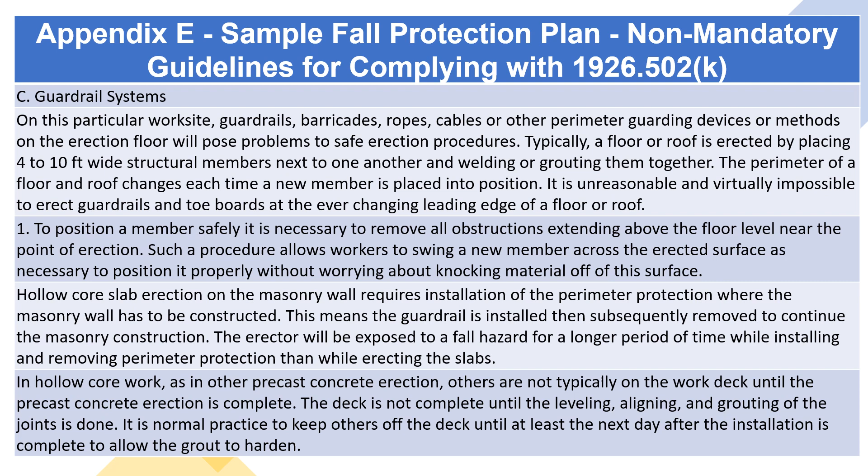There is no permanent boundary until all structural members have been placed in the floor or roof. At the leading edge, workers are operating at the temporary edge of the structure as they work to position the next member in the sequence.

Compliance with the standard would require a guardrail and toe board be installed along this edge. However, the presence of such a device would prevent a new member from being swung over the erected surface low enough to allow workers to control it safely during the positioning process. Further, these employees would have to work through the guardrail to align the new member and connect it to the structure. The guardrail would not protect an employee who must lean through it to do the necessary work; rather it would hinder the employee to such a degree that a greater hazard is created than if the guardrail were absent.

Guardrail requirements pose a hazard at the leading edge of installed floor or roof sections by creating the possibility of employees being caught between guardrails and suspended loads. The lack of a clear work area in which to guide the suspended load into position for placement and welding of members into the existing structure creates still further hazards. Where erection processes require precast concrete stairways or openings to be installed as an integral part of the overall erection process, it must also be recognized that guardrails or handrails must not project above the surface of the erection floor. Such guardrails should be terminated at the level of the erection floor to avoid placing hazardous obstacles in the path of a member being positioned.

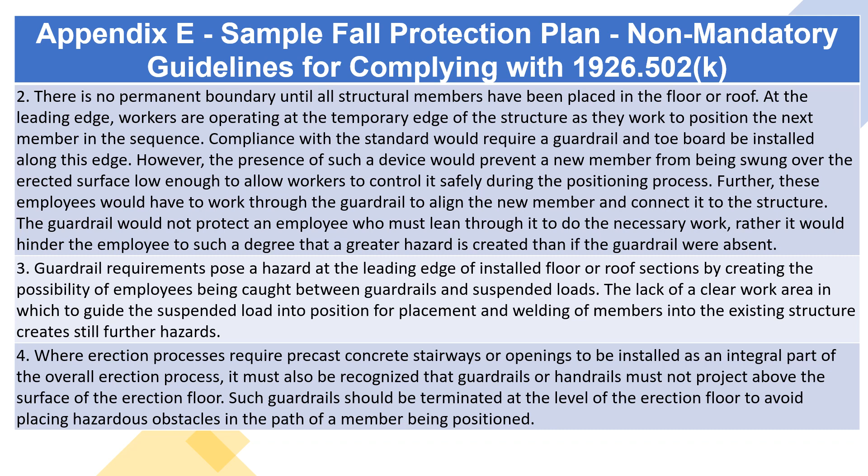Other fall protection measures considered for this job: the following is a list and explanation of other fall protection measures available, and an explanation of limitations for use on this particular job site. If during the course of erecting the building the employee sees an area that could be erected more safely by the use of these fall protection measures, the foreman should be notified.

A. Scaffolds are not used because: 1. The leading edge of the building is constantly changing and the scaffolding would have to be moved at very frequent intervals. Employees erecting and dismantling the scaffolding would be exposed to fall hazards for a greater length of time than they would by merely erecting the precast concrete member. 2. A scaffold tower could interfere with the safe swinging of a load by the crane.

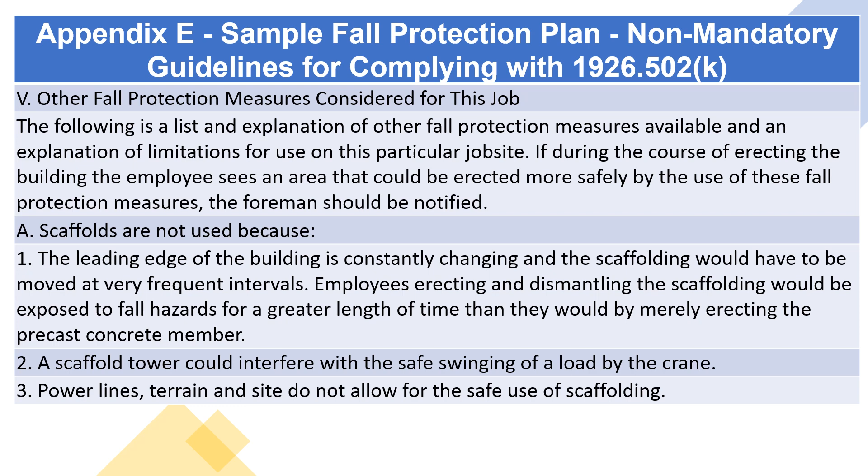3. Power lines, terrain, and site do not allow for the safe use of scaffolding. B. Vehicle-mounted platforms are not used because: 1. A vehicle-mounted platform will not reach areas on the deck that are erected over other levels. 2. The leading edge of the building is usually over a lower level of the building, and this lower level will not support the weight of a vehicle-mounted platform. 3. A vehicle-mounted platform could interfere with the safe swinging of a load by the crane, either by the crane swinging the load over or into the equipment. 4. Power lines and surrounding site work do not allow for the safe use of a vehicle-mounted platform.

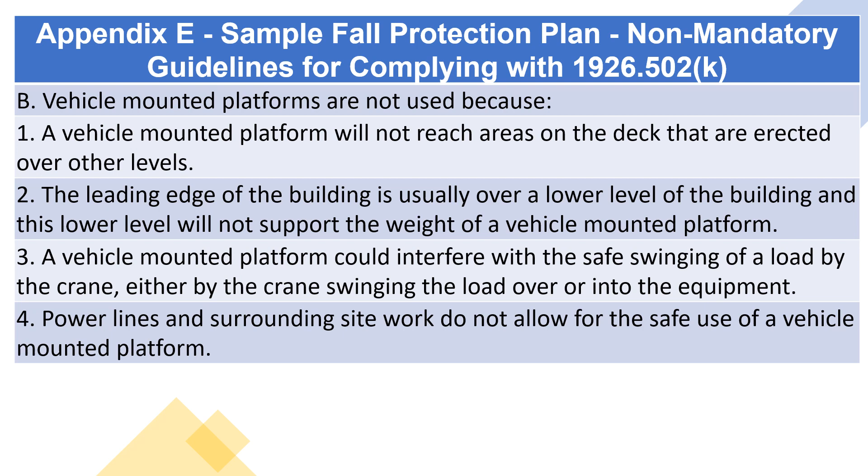C. Crane suspended personnel platforms are not used because: 1. A second crane close enough to suspend any employee in the working and erecting area could interfere with the safe swinging of a load by the crane hoisting the product to be erected. 2. Power lines and surrounding site work do not allow for the safe use of a second crane on the job.

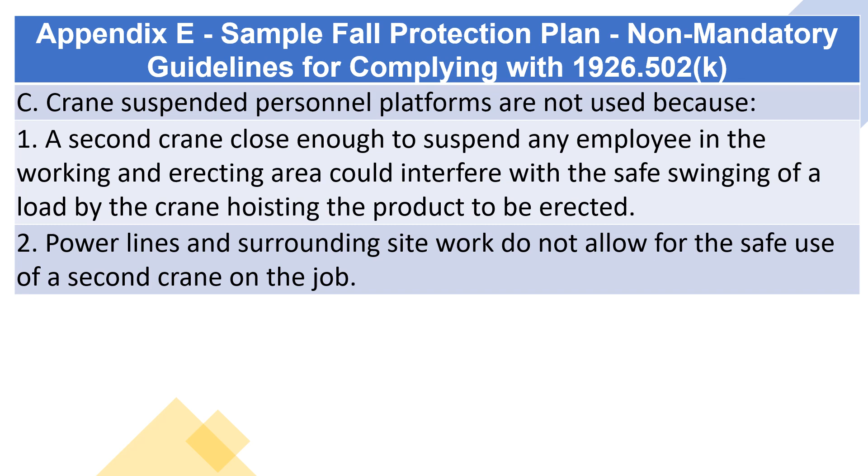6. Enforcement. Constant awareness of and respect for fall hazards, and compliance with all safety rules are considered conditions of employment. The job site superintendent, as well as individuals in the Safety and Personnel Department, reserve the right to issue disciplinary warnings to employees, up to and including termination, for failure to follow the guidelines of this program.

7. Accident investigations. All accidents that result in injury to workers, regardless of their nature, shall be investigated and reported. It is an integral part of any safety program that documentation take place as soon as possible so that the cause and means of prevention can be identified to prevent a reoccurrence. In the event that an employee falls or there is some other related serious incident occurring, this plan shall be reviewed to determine if additional practices, procedures, or training need to be implemented to prevent similar types of falls or incidents from occurring.

8. Changes to plan. Any changes to the plan will be approved by the name of the qualified person. This plan shall be reviewed by a qualified person as the job progresses to determine if additional practices, procedures, or training needs to be implemented by the competent person to improve or provide additional fall protection. Workers shall be notified and trained, if necessary, in the new procedures. A copy of this plan and all approved changes shall be maintained at the job site.

Sample Fall Protection Plan for Residential Construction, insert company name. This fall protection plan is specific for the following project: location of job, date plan prepared or modified, plan prepared by, plan approved by, plan supervised by.

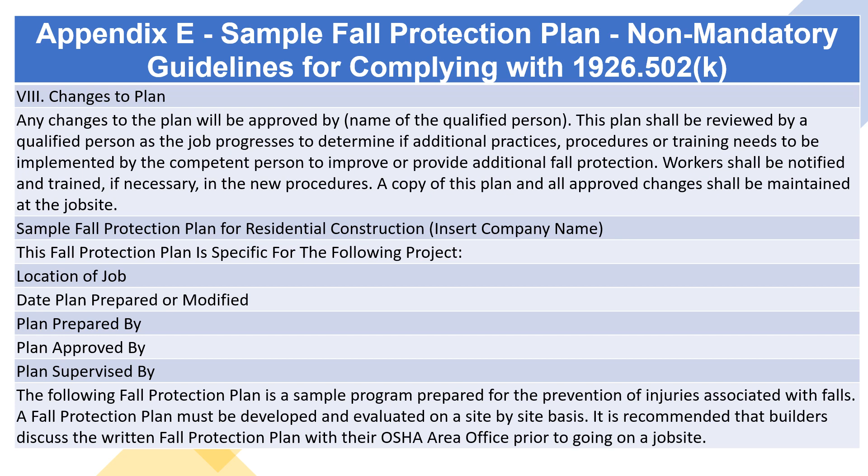The following fall protection plan is a sample program prepared for the prevention of injuries associated with falls. A fall protection plan must be developed and evaluated on a site-by-site basis. It is recommended that builders discuss the written fall protection plan with their OSHA area office prior to going on a job site. Statement of company policy: your company name here is dedicated to the protection of its employees from on-the-job injuries.

All employees of [your company name here] have the responsibility to work safely on the job. The purpose of this plan is to supplement our existing safety and health program and to ensure that every employee who works for [your company name here] recognizes workplace fall hazards and takes the appropriate measures to address those hazards.

This fall protection plan addresses the use of conventional fall protection at a number of areas on the project, as well as identifies specific activities that require non-conventional means of fall protection.

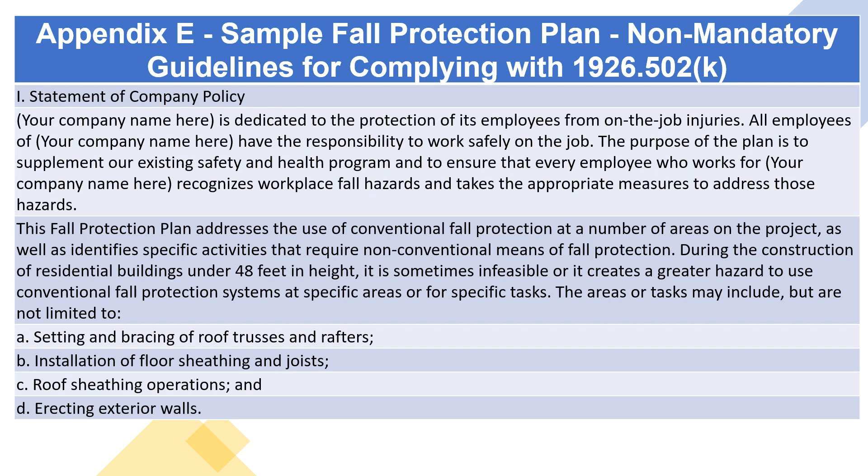During the construction of residential buildings under 48 feet in height, it is sometimes infeasible or it creates a greater hazard to use conventional fall protection systems at specific areas or for specific tasks. These areas or tasks may include, but are not limited to: setting and bracing of roof trusses and rafters; installation of floor sheathing and joists; roof sheathing operations; and erecting exterior walls. In these cases, conventional fall protection systems may not be the safest choice for builders.

This plan is designed to enable employers and employees to recognize the fall hazards associated with this job and to establish the safest procedures that are to be followed in order to prevent falls to lower levels or through holes and openings in walking/working surfaces.

Each employee will be trained in these procedures and will strictly adhere to them except when doing so would expose the employee to a greater hazard. If, in the employee's opinion, this is the case, the employee is to notify the competent person of their concern and have the concern addressed before proceeding.

It is the responsibility of [name of competent person] to implement this fall protection plan. Continual observational safety checks of work operations and the enforcement of the safety policy and procedures shall be regularly enforced. The crew supervisor or foreman, [insert name], is responsible for correcting any unsafe practices or conditions immediately.

It is the responsibility of the employer to ensure that all employees understand and adhere to the procedures of this plan and to follow the instructions of the crew supervisor. It is also the responsibility of the employee to bring to management's attention any unsafe or hazardous conditions or practices that may cause injury to either themselves or any other employees.

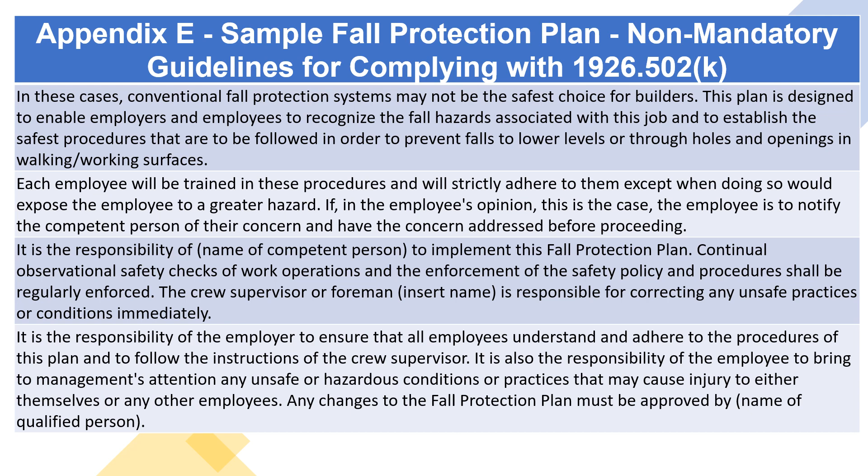Any changes to the fall protection plan must be approved by [name of qualified person]. Section 2: Fall protection systems to be used on this job.

Installation of roof trusses/rafters, exterior wall erection, roof sheathing, floor sheathing, and joist/truss activities will be conducted by employees who are specifically trained to do this type of work and are trained to recognize the fall hazards. The nature of such work normally exposes the employee to the fall hazard for a short period of time. This plan details how [your company name here] will minimize these hazards.

Controlled access zones: When using this plan to implement the fall protection options available, workers must be protected through limited access to high hazard locations. Before any non-conventional fall protection systems are used as part of the work plan, a controlled access zone (CAZ) shall be clearly defined by the competent person as an area where a recognized hazard exists.

The demarcation of the CAZ shall be communicated by the competent person in a recognized manner, either through signs, wires, tapes, ropes or chains. [Your company name here] shall take the following steps to ensure that the CAZ is clearly marked or controlled by the competent person.

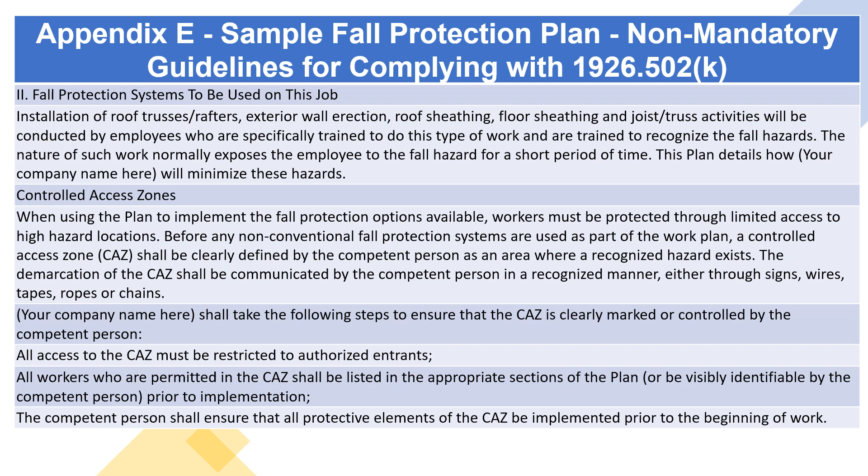All access to the CAZ must be restricted to authorized entrants. All workers who are permitted in the CAZ shall be listed in the appropriate sections of the plan, or be visibly identifiable by the competent person, prior to implementation. The competent person shall ensure that all protective elements of the CAZ be implemented prior to the beginning of work.

Installation procedures for roof truss and rafter erection. During the erection and bracing of roof trusses/rafters, conventional fall protection may present a greater hazard to workers.

On this job, safety nets, guardrails and personal fall arrest systems will not provide adequate fall protection because the nets will cause the walls to collapse, while there are no suitable attachment or anchorage points for guardrails or personal fall arrest systems. On this job, requiring workers to use a ladder for the entire installation process will cause a greater hazard.

This is because the worker must stand on the ladder with his back or side to the front of the ladder. While erecting the truss or rafter, the worker will need both hands to maneuver the truss and therefore cannot hold onto the ladder.

Ladders cannot be adequately protected from movement while trusses are being maneuvered into place. Many workers may experience additional fatigue because of the increase in overhead work with heavy materials, which can also lead to a greater hazard. Exterior scaffolds cannot be utilized on this job because the ground, after recent backfilling, cannot support the scaffolding. In most cases, the erection and dismantling of the scaffold would expose workers to a greater fall hazard than erection of the trusses/rafters.

On all walls 8 feet or less, workers will install interior scaffolds along the interior wall below the location where the trusses/rafters will be erected. Sawhorse scaffolds constructed of 46-inch sawhorses and 2x10 planks will often allow workers to be elevated high enough to allow for the erection of trusses and rafters without working on the top plate of the wall.

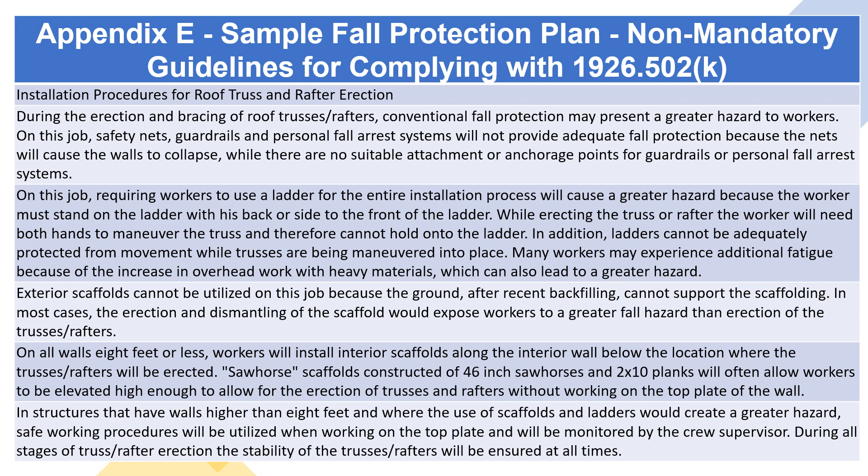In structures that have walls higher than 8 feet and where the use of scaffolds and ladders would create a greater hazard, safe working procedures will be utilized when working on the top plate and will be monitored by the crew supervisor. During all stages of truss/rafter erection, the stability of the trusses/rafters will be ensured at all times.

Your company name here shall take the following steps to protect workers who are exposed to fall hazards while working from the top plate installing trusses/rafters. Only the following trained workers will be allowed to work on the top plate during roof truss or rafter installation. Workers shall have no other duties to perform during truss/rafter erection procedures.

All trusses/rafters will be adequately braced before any worker can use the truss/rafter as a support. Workers will remain on the top plate using the previously stabilized truss/rafter as a support while other trusses/rafters are being erected. Workers will leave the area of the secured trusses only when it is necessary to secure another truss/rafter.

The first 2 trusses/rafters will be set from ladders leaning on side walls at points where the walls can support the weight of the ladder, and a worker will climb onto the interior top plate via a ladder to secure the peaks of the first 2 trusses/rafters being set.

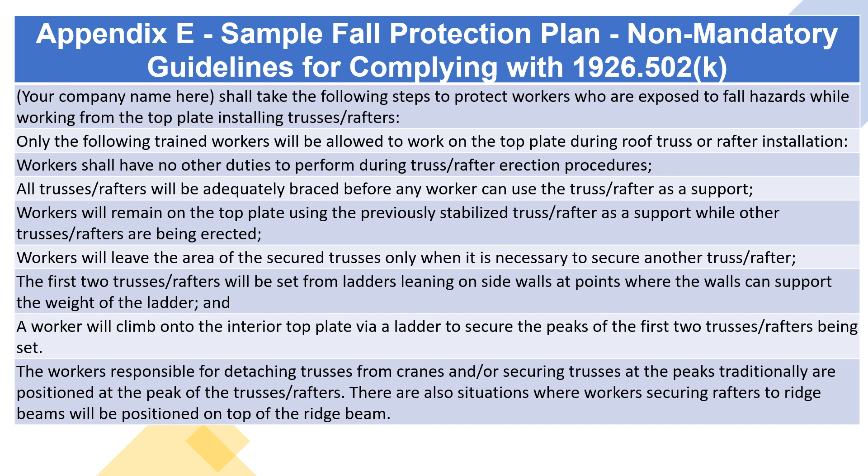The workers responsible for detaching trusses from cranes and or securing trusses at the peaks traditionally are positioned at the peak of the trusses/rafters. There are also situations where workers securing rafters to ridge beams will be positioned on top of the ridge beam.

Your company name here shall take the following steps to protect workers who are exposed to fall hazards while securing trusses/rafters at the peak of the trusses/ridge beam. Only the following trained workers will be allowed to work at the peak during roof truss or rafter installation.

Once truss or rafter installation begins, workers not involved in that activity shall not stand or walk below or adjacent to the roof opening or exterior walls in any area where they could be struck by falling objects. Workers shall have no other duties than securing/bracing the trusses/ridge beam.

Workers positioned at the peaks or in the webs of trusses or on top of the ridge beam shall work from a stable position, either by sitting on a ridge seat or other equivalent surface that provides additional stability, or by positioning themselves in previously stabilized trusses/rafters and leaning into and reaching through the trusses/rafters. Workers shall not remain on or in the peak/ridge any longer than necessary to safely complete the task.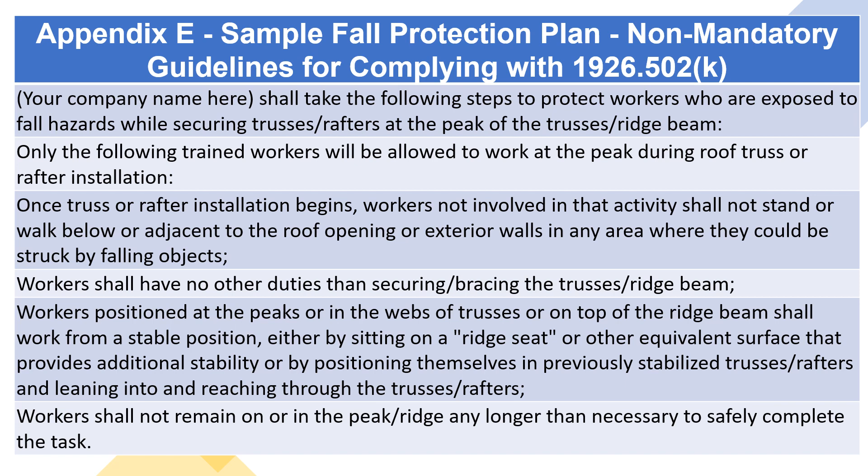Roof sheathing operations. Workers typically install roof sheathing after all trusses/rafters and any permanent truss bracing is in place. Roof structures are unstable until some sheathing is installed, so workers installing roof sheathing cannot be protected from fall hazards by conventional fall protection systems until it is determined that the roofing system can be used as an anchorage point. At that point, employees shall be protected by a personal fall arrest system.

Trusses/rafters are subject to collapse if a worker falls while attached to a single truss with a belt/harness. Nets could also cause collapse, and there is no place to attach guardrails.

All workers will ensure that they have secure footing before they attempt to walk on the sheathing, including cleaning shoes/boots of mud or other slip hazards. To minimize the time workers must be exposed to a fall hazard, materials will be staged to allow for the quickest installation of sheathing.

Your company name here shall take the following steps to protect workers who are exposed to fall hazards while installing roof sheathing. Once roof sheathing installation begins, workers not involved in that activity shall not stand or walk below or adjacent to the roof opening or exterior walls in any area where they could be struck by falling objects.

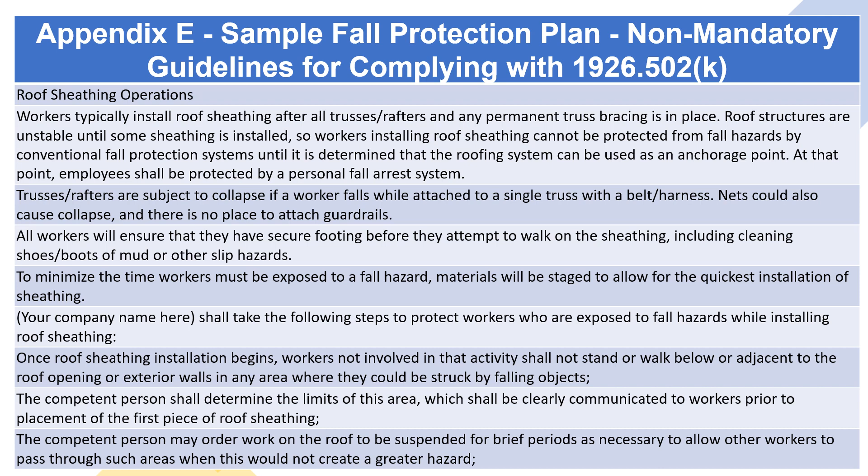The competent person shall determine the limits of this area, which shall be clearly communicated to workers prior to placement of the first piece of roof sheathing. The competent person may order work on the roof to be suspended for brief periods as necessary to allow other workers to pass through such areas when this would not create a greater hazard.

Only qualified workers shall install roof sheathing. The bottom row of roof sheathing may be installed by workers standing in truss webs.

After the bottom row of roof sheathing is installed, a slide guard extending the width of the roof shall be securely attached to the roof. Slide guards are to be constructed of no less than nominal 4-inch height, capable of limiting the uncontrolled slide of workers. Workers should install the slide guard while standing in truss webs and leaning over the sheathing.

Additional rows of roof sheathing may be installed by workers positioned on previously installed rows of sheathing. A slide guard can be used to assist workers in retaining their footing during successive sheathing operations, and additional slide guards shall be securely attached to the roof at intervals not to exceed 13 feet as successive rows of sheathing are installed. For roofs with pitches in excess of 9-in-12, slide guards will be installed at 4-foot intervals.

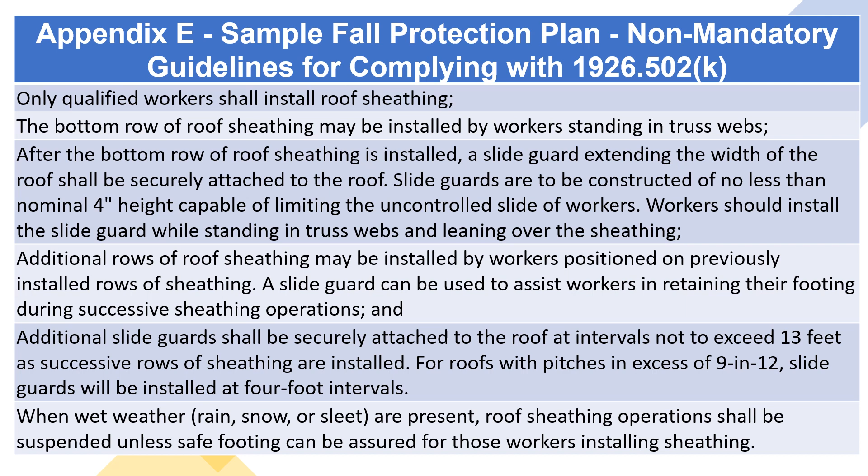When wet weather, rain, snow, or sleet are present, roof sheathing operations shall be suspended unless safe footing can be assured for those workers installing sheathing. When strong winds above 40 miles per hour are present, roof sheathing operations are to be suspended unless windbreakers are erected.

Installation of floor joists and sheathing. During the installation of floor sheathing and joists, leading edge construction, the following steps shall be taken to protect workers. Only the following trained workers will be allowed to install floor joists or sheathing. Materials for the operation shall be conveniently staged to allow for easy access to workers.

The first floor joists or trusses will be rolled into position and secured either from the ground, ladders, or sawhorse scaffolds. Each successive floor joist or truss will be rolled into place and secured from a platform created from a sheet of plywood laid over the previously secured floor joists or trusses.

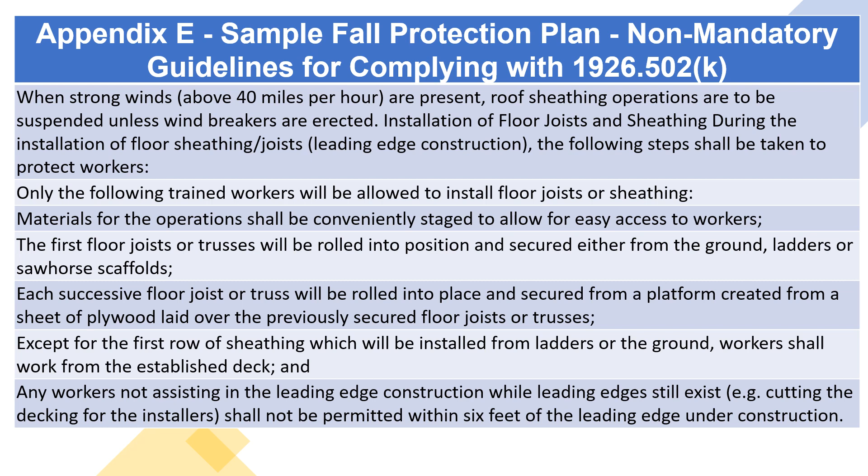Except for the first row of sheathing, which will be installed from ladders or the ground, workers shall work from the established deck, and any workers not assisting in the leading edge construction while leading edges still exist, e.g. cutting the decking for the installers, shall not be permitted within 6 feet of the leading edge under construction.

Erection of exterior walls. During the construction and erection of exterior walls, employers shall take the following steps to protect workers. Only the following trained workers will be allowed to erect exterior walls.

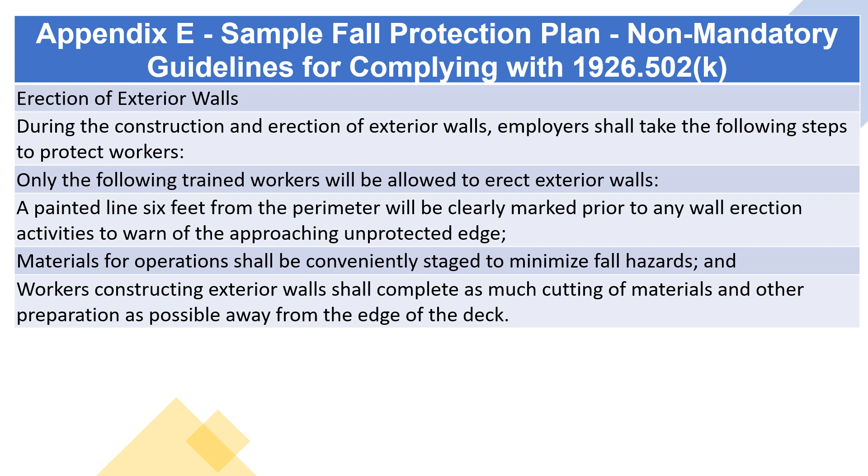A painted line 6 feet from the perimeter will be clearly marked prior to any wall erection activities to warn of the approaching unprotected edge. Materials for operations shall be conveniently staged to minimize fall hazards, and workers constructing exterior walls shall complete as much cutting of materials and other preparation as possible away from the edge of the deck.

Enforcement. Constant awareness of and respect for fall hazards, and compliance with all safety rules are considered conditions of employment. The crew supervisor or foreman, as well as individuals in the Safety and Personnel Department, reserve the right to issue disciplinary warnings to employees, up to and including termination, for failure to follow the guidelines of this program.

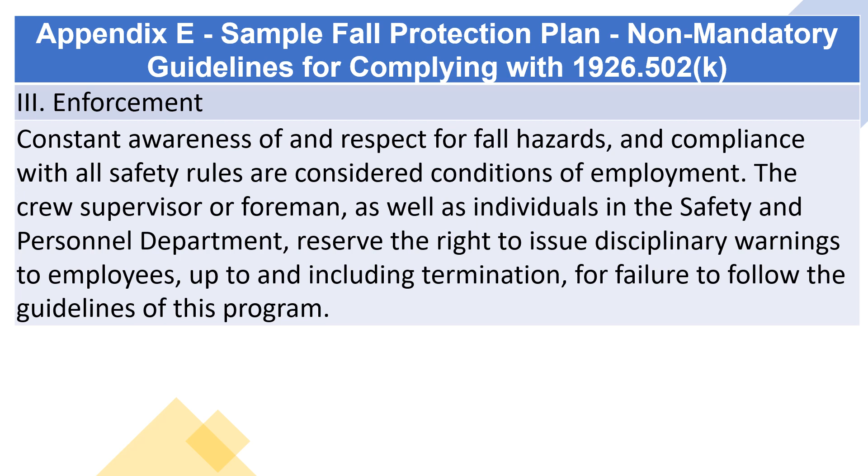Accident investigations. All accidents that result in injury to workers, regardless of their nature, shall be investigated and reported. It is an integral part of any safety program that documentation take place as soon as possible so that the cause and means of prevention can be identified to prevent a reoccurrence.

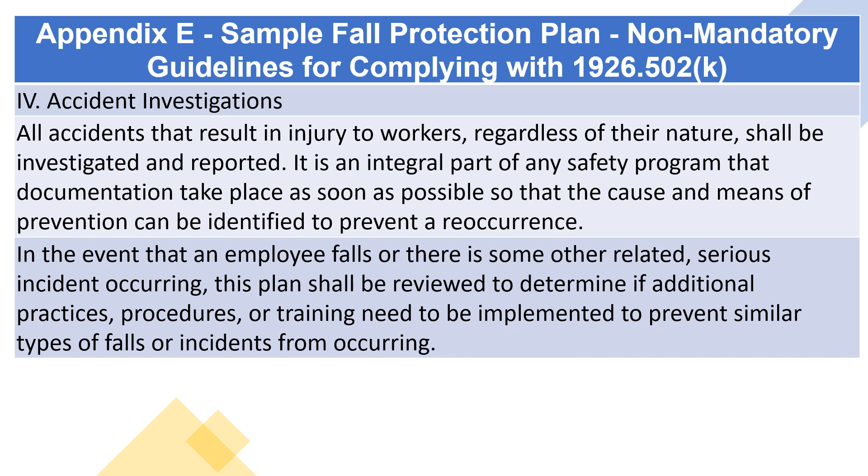In the event that an employee falls or there is some other related, serious incident occurring, this plan shall be reviewed to determine if additional practices, procedures, or training need to be implemented to prevent similar types of falls or incidents from occurring.

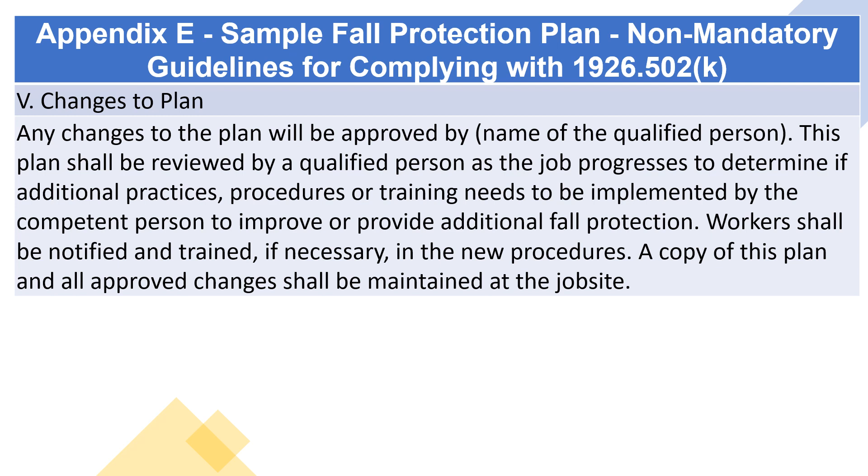Changes to plan. Any changes to the plan will be approved by the name of the qualified person. This plan shall be reviewed by a qualified person as the job progresses to determine if additional practices, procedures, or training needs to be implemented by the competent person to improve or provide additional fall protection. Workers shall be notified and trained, if necessary, in the new procedures. A copy of this plan and all approved changes shall be maintained at the job site.